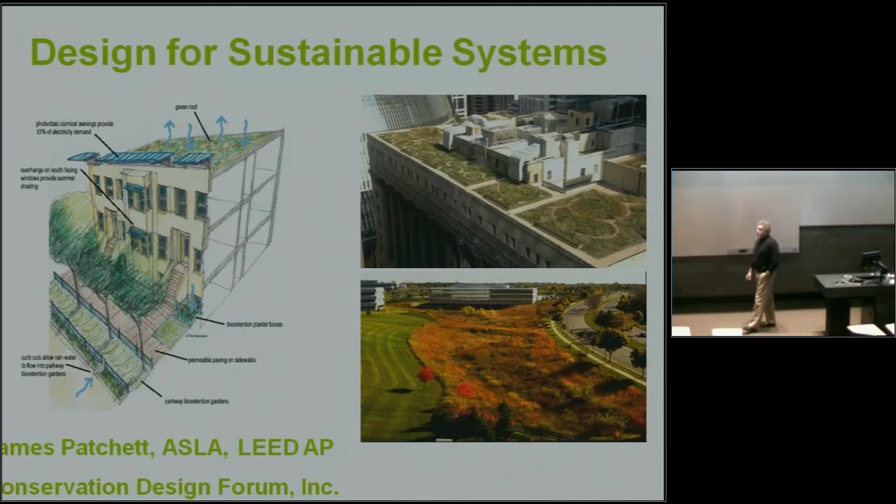My program today is going to start out with a review of historical ecosystem functions. It's going to be kind of Science 101, because if we don't understand the way the world works, wherever we live and work and play, we don't have much hope of designing sustainable solutions.

Much of our training, particularly in the design fields, historically has been more in the visual arts than deeply embedded in the understanding of ecological system functions. When you get too far onto one side—not that you can't have great beauty, you should have great beauty—but that beauty has to be integrated into the underlying physical and cultural fabric of place. That's what we're just starting to catch up on in the entire sustainable design realm.

I'm going to talk a fair amount about some of the liabilities associated with conventional planning and design practices, particularly water management practices—or I should say water mismanagement practices—because you'll see throughout the course of this program and over the next several days, while we'll talk about a broad scale of projects from very site-specific up to regional contexts, water is going to be the thread that ties all of this together for us. We're a quote-unquote water-centric design firm.

Water is where we begin every design, and it leads us through every step of the way, because it's our philosophy that if we can learn as designers and engineers and construction practitioners how to actually receive the life-giving precious resource of water as a resource, and not generate a waste product to be sent off someplace else and leave ourselves in deficit, that will lead us to quality design at every other step of the way. So water will be this underlying theme.

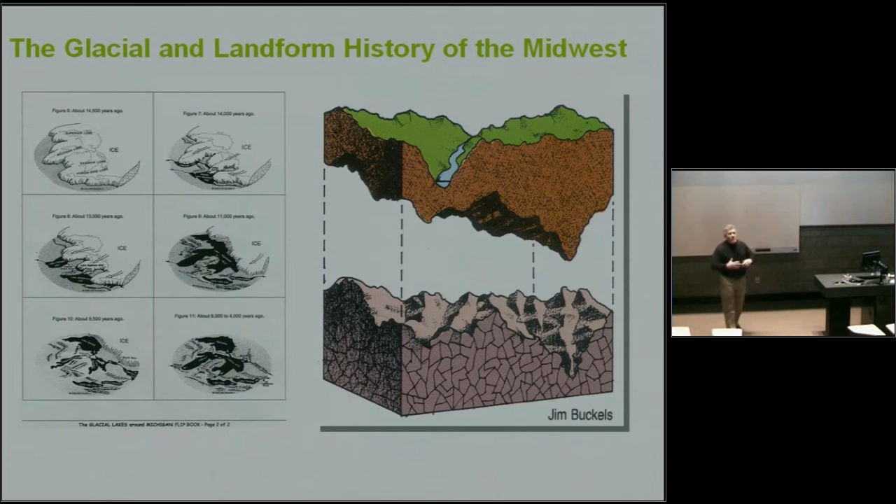Indiana, and for that matter anywhere across the face of North America, was a very lived-in landscape. And human beings had very purposeful interactions with that landscape, to the point where all of the flora and fauna and other aspects co-evolved with humans, again in very purposeful ways.

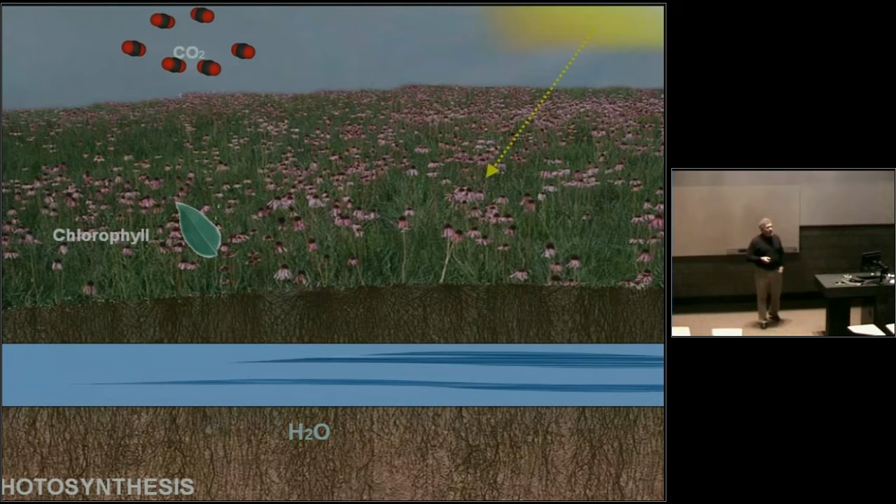So here's where I go back to kind of Science 101, photosynthesis. Of course it's why we all exist. You have essentially sunlight energy in the presence of moisture coming up through the root systems, carbon dioxide from the atmosphere, and those little green solar receptor cells in the living tissues of plants that, through the combination of these processes coming together, actually have the ability to convert sunlight energy into our life energy. So you give off oxygen and energy.

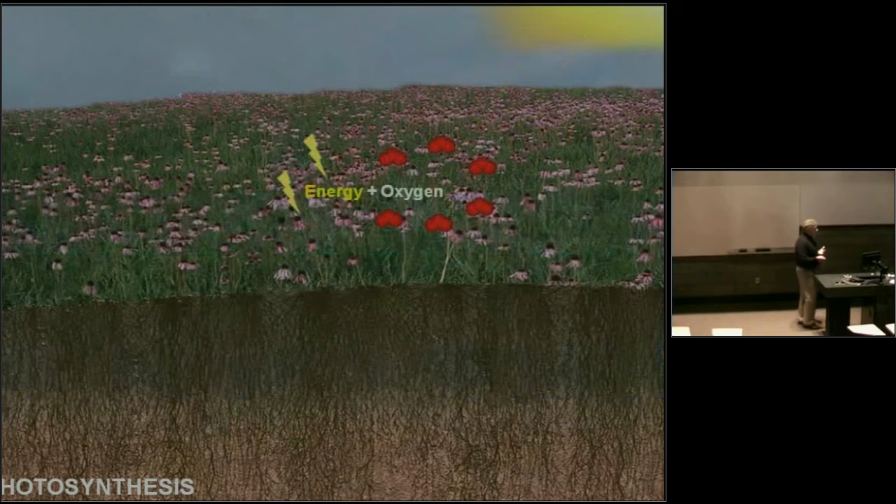So photosynthesis is essentially a fairly complex but simple to grasp combination: 6 molecules of water and 6 molecules of carbon dioxide, which produce 6 molecules of oxygen and a 6-carbon chain of sugar, which of course is our life. Every living organism on Earth has the inherent genetic ability to take that sugar and convert it into our own life's energy, the embedded energy of the sun. Without this, we would not exist.

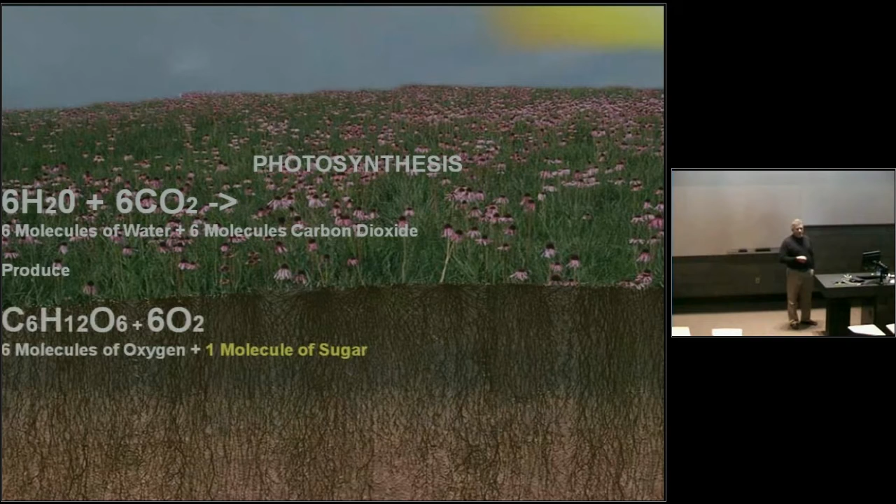Well, why is that particularly relevant? We live in a part of the world that is still part of this massive grassland system of the upper Midwest, a mosaic of woodland systems, but still a massive prairie ecology.

When a prairie ecology is photosynthesizing, if I could share one thing about the way the world works in the upper Midwest as it relates to these grassland systems, it would be this cross-section, because on average, anywhere from 70 to 90% of the total plant mass existed below ground in a massive root architecture, somewhere around 15 to 20,000 pounds of root mass per acre. Today, in an acre of corn and soybeans, which primarily covers most of the upper Midwest, we're looking at around 300 to 600 pounds of root mass per acre in an annual plant that spends most of its energy growing above ground and producing fruit, whereas this is a perennial system.

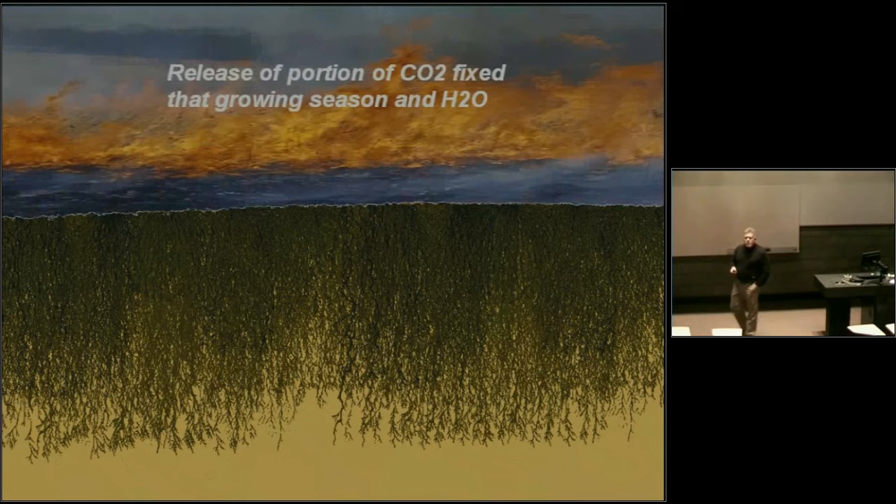As this perennial system is photosynthesizing, at the end of the year, usually within a couple of days of the first hard frost, the native people would fire that landscape off. The Algonquian-speaking people of this part of the world, their word for prairie is mashkota, meaning the burned over bare land. So they would come in and fire that landscape off, releasing a portion of the carbon that had been fixed that year, but only the portion fixed above ground in the living green tissues of plants. The rest of the carbon fixed that year, since 70 to 90% of plant mass exists in the root system, would actually be fixed underground.

Somewhere on average, probably between a half to more than 2 tons of soil organic carbon accumulation per acre per year. That annual carbon cycle removes carbon dioxide, breaks it down, and gets it into this soil structure. About a third of this root system on average dies off every year and starts to break down into organic matter. But now it's organic matter that is rich in carbon. So you take the sands, silts, and clays of the glacial till plain and slowly but surely, to the tune of 1 to 2 tons or more of SOC accumulation per year, turn it into the richest topsoil in the world.

Now, have we been very good stewards of that resource? One would have to ask ourselves. Of course, the answer is absolutely not. We've managed over the course of 150 years to waste most of it. I grew up in eastern Illinois and then in southeastern Iowa, and believe me, Iowa, much of which is a much older landscape than here in the northern two-thirds of Indiana, has primarily lost all of its 18 to 24 inches of topsoil because of annual row crop tillage—one of the most ecologically and economically unsustainable forms of land use on Earth. Yellow ain't green, folks. I came from a farm, so I'm not intending to insult any of our agricultural folks here, but the fact is it's an unsustainable form of land use in its current state.

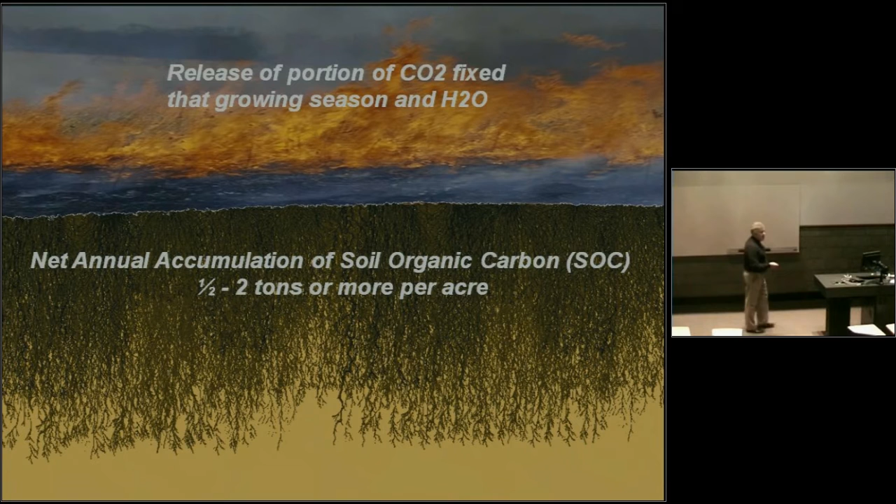So, we suck carbon out of the atmosphere and build rich topsoil with 15 to 20,000 pounds of root mass per acre. Why is that relevant as it relates to water?

Well, because we get about 37 inches of precipitation per year here. Is that about what you get? That's what we get in the Chicagoland area—I think you're fairly close to us. So we get 37 inches of precipitation, more than 90% of which during rainfall events exists over a 24-hour period in less than 1 inch of rainfall. Certainly we get larger rainfall events, our 10-year and 100-year storm events between 5 and 7 inches of precipitation over a 24-hour period, but 90% is less than one inch of intensity and duration over that period.

So you can imagine if you had a 2 or 3 foot black organic-rich topsoil blanket laced with root system across the entire geographic face of your region, what happened when it rained? Essentially 3 things occur when it rained here historically, none of which were surface water runoff. The only time of year you'd have surface water runoff to any noticeable degree would be in a spring snowmelt scenario where the ground was still frozen. You get an early thaw on top, maybe one of those late February, early March rainfalls on top of snow, and all of that water starts to move, if it can, although it's fairly flat.

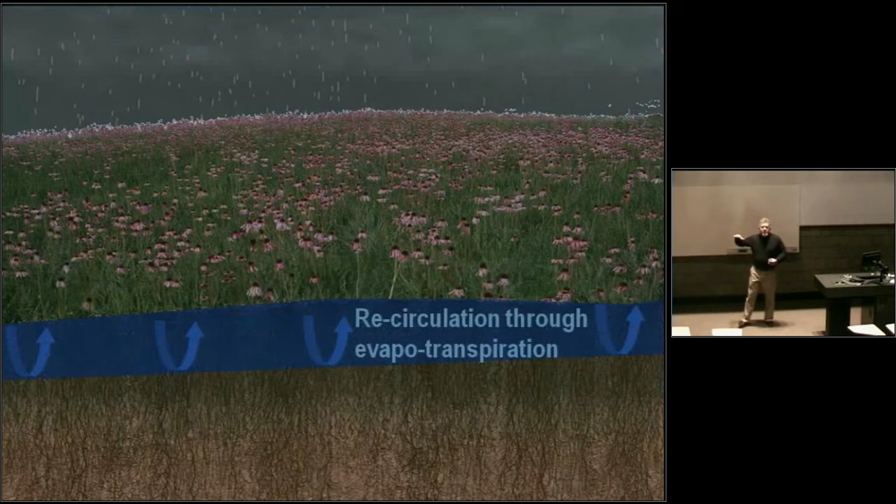Of course, today our snowmelt hydrology is quite drastically different. We have gouged and carved and piped, so when we have a snowmelt scenario, the whole system flushes itself out almost immediately. But in a general rainfall system, in non-frozen conditions, most rainfall events were probably captured in the first few inches of soil and simply evapotranspired back into the atmosphere. That's a very important part of the hydrological cycle that most engineers have virtually little to no training or grasp of.

The ability for a living landscape system to constantly be evapotranspiring - water goes out, water comes in. Every day if you walk out, even on your lawn, in the middle of summer, even during a drought, your shoes are going to be wet. In a prairie, your whole leg was wet, depending on what time of year it was. So it was a very self-watering and wet system.

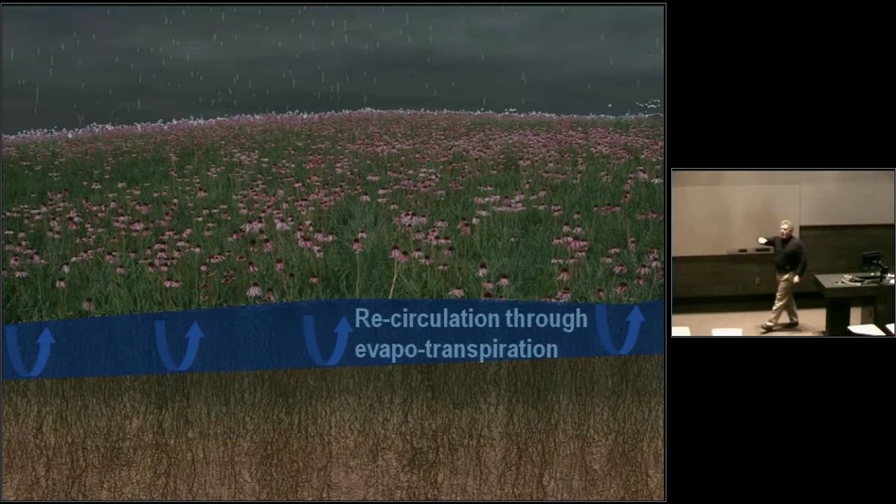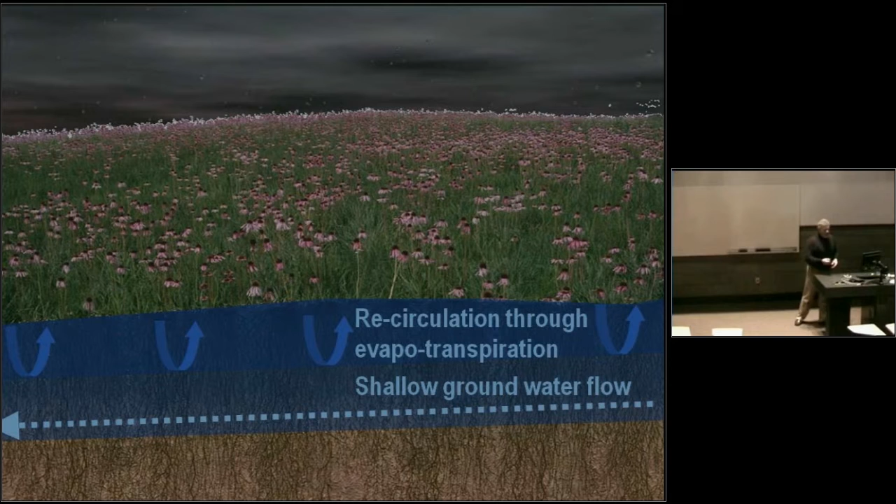As you get more free water moving down through those root systems, now you're influenced by the combination of topography, geology, soil structure, and you start to get lateral water flow above the water table in the vadose layer. Eventually you get recharge of your groundwater systems as more free water moves down there. So the recharge of our aquifers occurred across the whole landscape, most effectively in the areas that were slightly higher and better drained.

And then the wetlands were actually formed - all of our aquatic systems formed and sustained by discharge, constant, steady discharge flow. The most important thing that I can share with you today relates to the function of historical terrestrial and aquatic systems and the relationships between them.

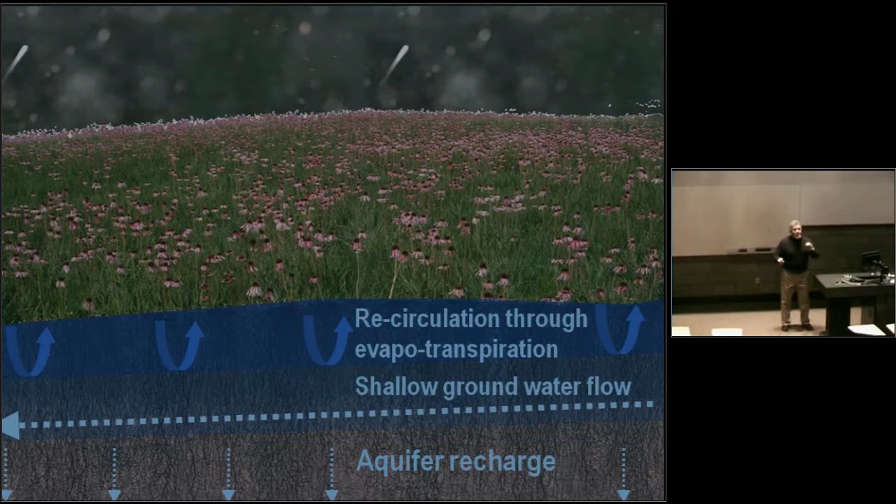So water moves out, dries back up, goes into the atmosphere. It doesn't run across the surface of the ground virtually at all.

Now, I wish I could say that I learned this in college. After all, I went through 4 degree programs, 2 major universities, and every one of those degree programs was related to the relationships of water and land. I didn't. I was trained in surface water hydrology and civil engineering as the conventional collect, pipe, and discharge. That's the way we're all trained - collect, pipe, and discharge. Unfortunately, the world just doesn't work very well when we misbehave in such ways.

I actually learned about the way the world works hydrologically about 20 years ago from one of my colleagues today, Dr. Gerould Wilhelm, who's a botanist and ecologist. I'll share with you, hopefully briefly, my professional epiphany, if you will.

I had been working for a firm in Ann Arbor, Michigan, Johnson, Johnson & Roy, back in the 80s, and we were doing a lot of wetland mitigation design because the state of Michigan had a Wetland Protection Act in place since 1978, requiring that all impacts to wetlands must be mitigated, regardless of size, type, scale, or origin.

So we would get out there, and we thought we were fairly creative in our design. We had a multidisciplinary team - landscape architects, hydrologists, ecologists and others all working together - and we were very diligent about identifying the appropriate suite of plants native to the county we were working in. We would create little vegetated swales and marshy areas to try to buffer the parking lot discharge as best we could from the Meijer or Walmart or shopping center we were mitigating for.

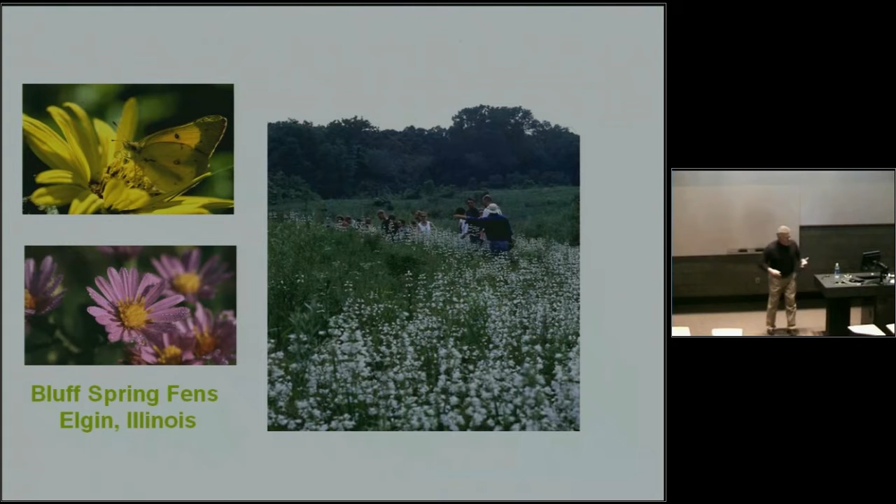So anyway, we're wandering around Bluff Spring Fen, and Jerry, of course, being the botanist that he is, spewing Latin out left and right. Well, I had been doing restoration sort of work at that point for well over 10 years, and I knew a lot of the standard, or usual, suspects, if you will.

But we were in a whole different realm, completely different realm of plants. I maybe had heard the genus before, but I certainly had never seen these species. And as you wander through the trails and along the hills, and then you get down into these seep zones, you see water discharging 365 days a year.

Doesn't matter whether it's rained or not, doesn't matter whether it hasn't rained. Because when it did rain last time, water got into the ground and is always working its way through the ground, where it slowly seeps out at 52 to 54 degrees, because that's the annual average groundwater temperature. Slightly alkaline in water chemistry because the soils are derived of dolomitic limestones. Steady, stable, utterly stable. You can see that as you walk along.

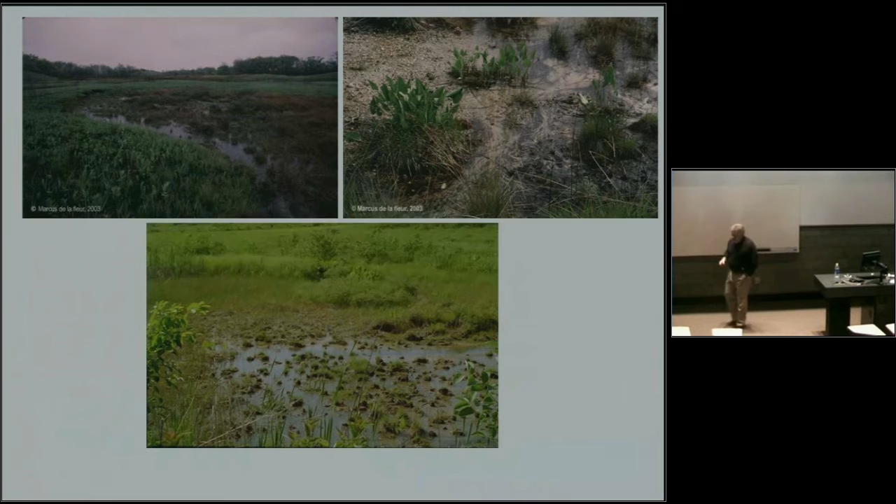And then we get down along the trail, and you see little holes in the ground start to open up. Here's this wonderful formation of a little woodland prairie stream, something that would have been replicated throughout this landscape around here in the upper Midwest millions upon millions of times, because this is the formation of our stream and river systems. This is how they came together with enough embedded water energy in the ground to actually come to the surface and form a stream.

And as we're walking down along the trail you see wonderful things going on. There's plenty of little erosion and sedimentation areas and so on, but this also reads like a who's who of Illinois threatened and endangered plant species. I mean, orchids and sedges that I'd never seen or heard of before. Just very, very interesting.

And you see that the hydrology is so stable and the water chemistry is so stable that there is the capacity for this system to evolve, for change to occur at a rate that plants and aquatic organisms actually adapt to. That is the inherent systems stability that was present after the retreat of the glaciers.

And as we wander down through there, Jerry is spewing off his Latin some more, and we get down to the end of Bluff Spring Fen, and you realize that it could pour, and I've been down here during and immediately after torrential rainfall events, and that little stream system never changes. Or long periods of drought, doesn't matter, never changes. The hydrology is always sustained by steady, stable base flow.

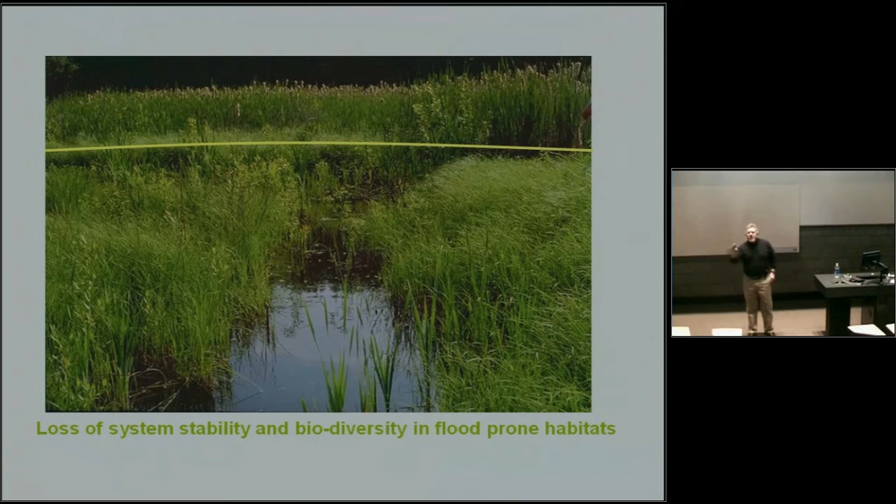Scary. Now, when I would go out and give these kinds of programs, even still today, but you can imagine 10, 12, 15 years ago, big rooms of 300-400 civil engineers, and I'm telling them that virtually everything they've been trained to do in stormwater engineering is goofy on its face. They're like, eh? Or they look like a deer that got hit in the headlights, as the light bulb starts to go off. Oh my God, wow. Or they just don't believe it. That's really a big part of the problem. They simply just don't believe it.

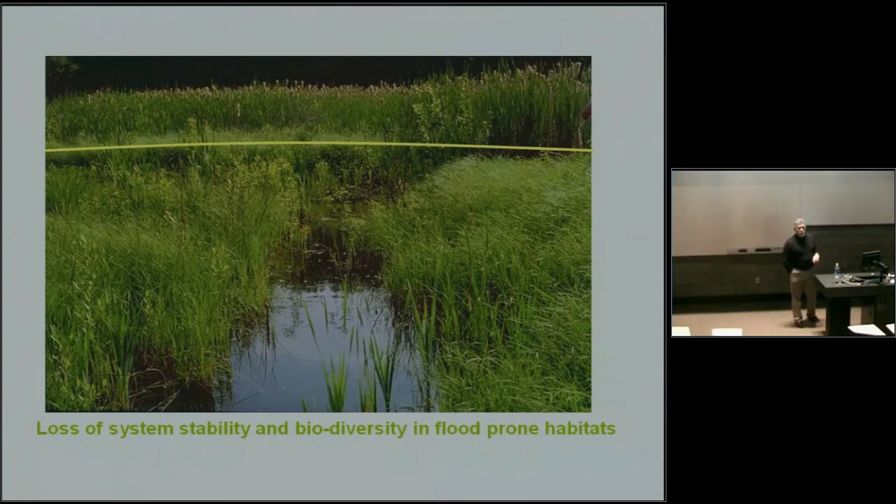So the historical patterns of hydrology are not dominated by runoff, but by steady, stable groundwater hydrology, and inherent water quality and chemistry from groundwater. The cross-section of most of our river corridors here shows that, and the interesting thing about plant establishment historically is that the flat till plains, because of the constant moisture moving in and out, were too wet for trees to grow. But that's where the water went in, across the whole cross-section. Right along these hillsides, along the bluffs and terrace areas, where you would create this little cone of depression, the trees could get a foothold. So, too dry for trees, too wet down in the discharge zone for trees, just right. That's the historical context of the relationships between grassland and woodland systems.

Now, of course, today we have so completely altered the hydrology, particularly the groundwater hydrology along our stream corridors, that we in the upper prairie states think we have forested floodplains, which is absolutely goofy on its face. It is a post-agrarian phenomenon to have the kind of vegetation growing up along our river corridors in the flat, low-lying areas. That is not a historical context.

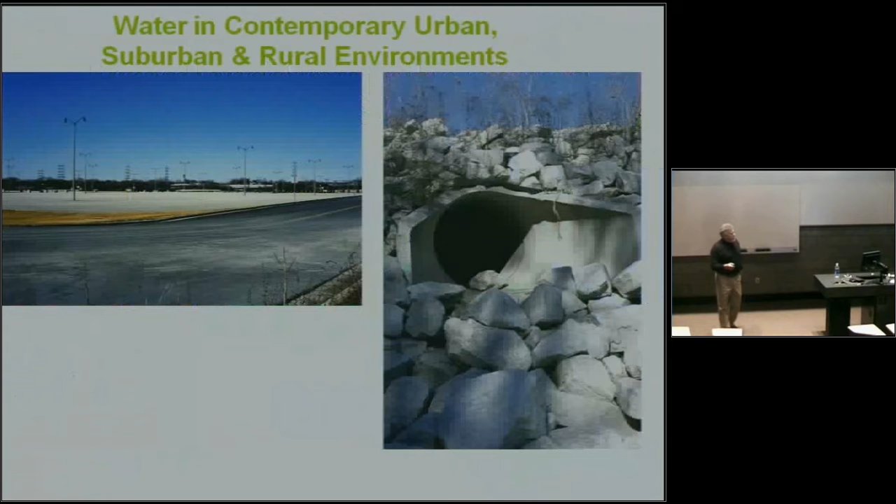Now, if you take a look at the way we're trained today, standard stormwater management means collecting water as quickly and efficiently as the law allows, almost always through enclosed storm sewer systems where we create concentrated points of discharge.

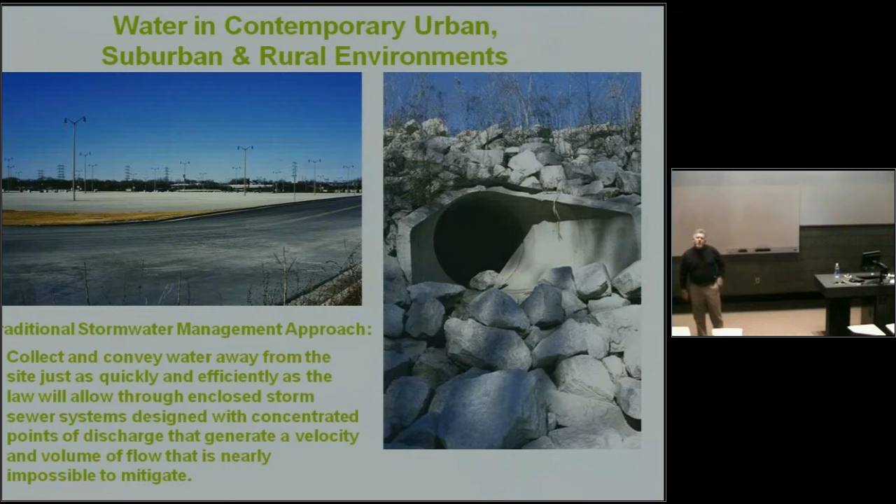Occasionally, by law, we are required to hold that volume of water back and then inject it out through our stormwater detention basins, like a lethal injection, into our streams and rivers. And we have codes and ordinances that mandate such behavior. Why, from a landscape perspective, you would think it really isn't outdoors.

It's simply exterior decoration. If I get my standard street trees by code and ordinance every 50 feet, uniform, and heaven forbid a tree might have a mind to grow a branch that's slightly different from the next one, because then, of course, you see, oh, this one's bad. The warden, that's what Jerry likes to call the landscape contractor, would unceremoniously come out and chop that little branch off so it looked ever the uniform little lollipop like the one right next to it.

And then, if you have a really good landscape architect like us, well, then you plant your little groups of shrubs in 3s and 5s and 7s and 9s and 11s, and every once in a while we'll throw in a 6 or an 8 just to be creative. And then everything that isn't covered by a building or a parking lot or a roadway must be covered by the one uniform landscape element required by code, and that would be the turf grass lawn.

Of course, along the way, as a development interest, we might have any specific fantasy we can dream up, like, oh, gee, I want so many square feet of buildings and parking lots. I got to have a little bit of open space out there, but we'll put the turf grass lawn in there. Now, because the turf grass lawn would die if it sat in water, and of course we mass grade because we have the ability through our bulldozers and our wealth...

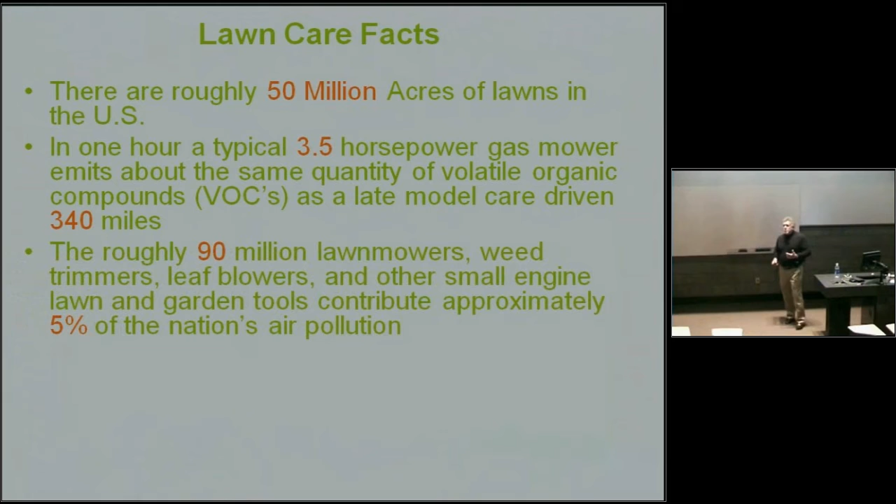A few lawn care facts along the way. One of the largest crops in the United States today, the turf grass lawn. For every 3.5 horsepower engine that you burn out there, you could have driven a contemporary non-hybrid car 340 miles. Roughly 90 million lawn mowers, weed whackers, gadgets, and gizmos represent 5% of our annual air pollution across the face of North America. The EPA estimates we spill about 17 million gallons of it a year just trying to get the lawnmower filled back up, and that's actually more than the Exxon Valdez spill.

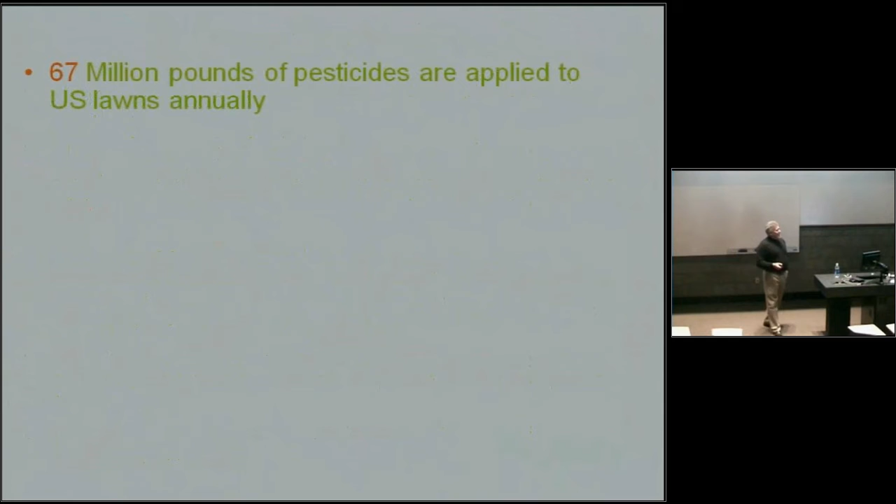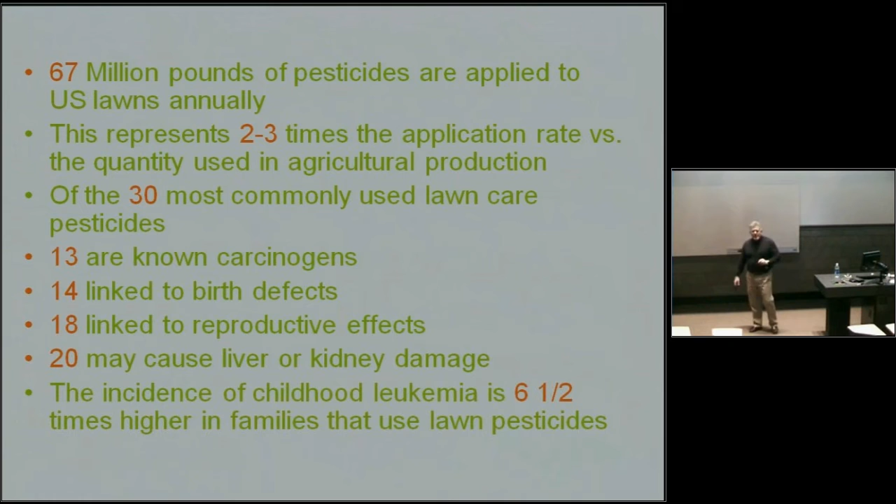We use 70 million tons of fertilizer, 67 million pounds of pesticides. That's actually 2 to 3 times more than what is used in contemporary agriculture, which of course has plenty of its own problems. Of the 30 most commonly used lawn care pesticides, 13 are known carcinogens, 14 are linked to birth defects, 18 linked to reproductive effects, 20 may cause liver or kidney damage. The incidence of childhood leukemia in a family that routinely uses lawn chemicals is 6.5 times higher than one that doesn't. And of course, if you like your cat and your dog and you let them go out and roll around in the lawn and they eat the grass, well, then they're 4 to 5 times more likely to actually get kidney and liver cancers themselves.

And of course, where does the water go? Now that it can't go back into the ground, it goes out through the pipe. But we followed the law. We have a stormwater control ordinance. We've held back that volume. We're good neighbors. It's just being sent out now, along with 40 to 60% of the nitrogen and phosphorus and other sorts of things that are also going with it, getting into our ground and surface water supplies.

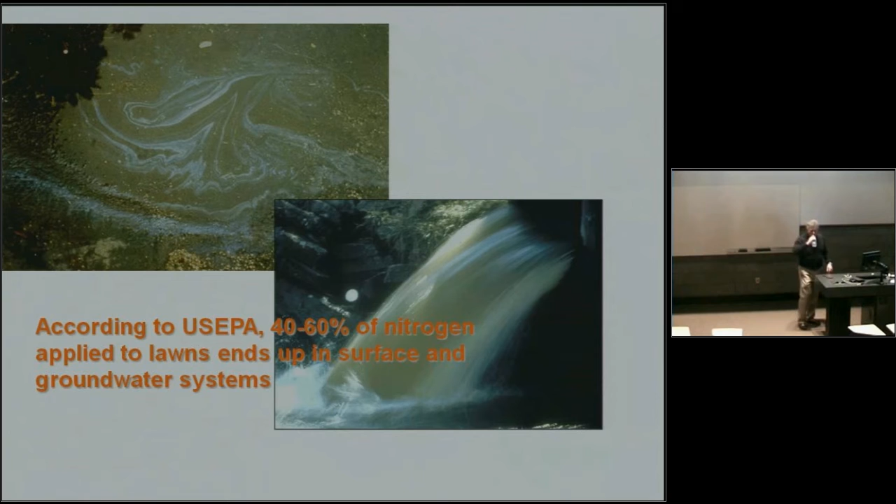So you start to see it's a pattern of problems. Now you've got your detention basins - dry bottom detention basin, wet bottom detention basin - but when you send all of the water from throughout the site into the little 10 to 15% of your property that's designated for the hole in the ground, that becomes problematic because it's very unstable.

Well, us engineers say it's no problem. We get a big fluctuation out there, we'll just armor it. It's very attractive - of course, geese like it. If you naturalize the edge of these places, the geese aren't quite so sure they want to go there because something might eat them. But when you armor it, hey, this is a great place for geese. And while geese lose the genetic memory of migration within one generation, they certainly haven't lost the ability to eat, reproduce, and poop - these are things they do very effectively.

We like it, we must like it - we write it into every law. Often because the holes in the ground have steep slopes, we put fences around them. I call this the water in jail syndrome. If you have an inexpensive piece of property, you can get away with an ugly chain link fence. But if you have a really valuable piece of property, something you wish you could do something else with other than build a hole in the ground on 10 to 15% of your site, then you've got to dress it up with a really nice fence.

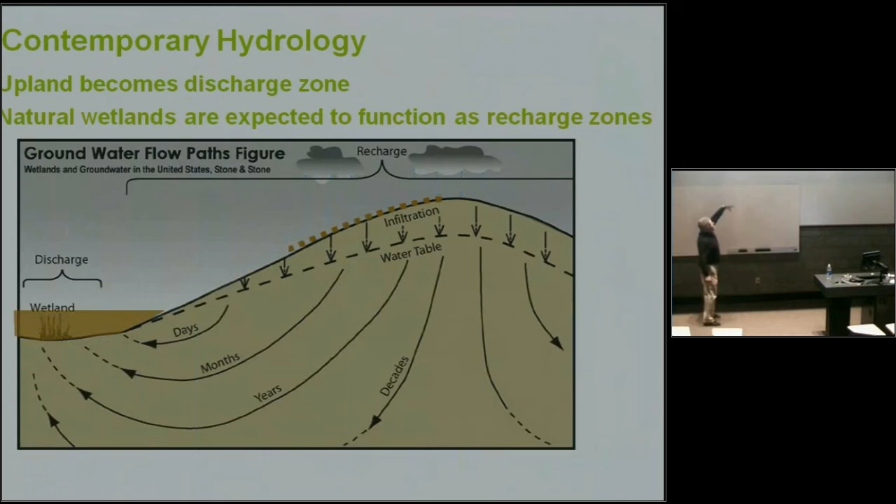So contemporary hydrology has actually changed 180 degrees from the historical context of stable groundwater-driven hydrology to one of very unstable surface water hydrology, where we pick up everything and dump it right on top of the wetlands, then come up with the completely absurd rhetoric that wetlands are for recharge and they're good. The primary functions and values of wetlands and aquatic systems are stormwater storage and water cleansing. How have we become so disconnected?

Well, we live here and here. This is what Jim Kunstler calls the triple NIMBY syndrome: I don't want a backyard in my backyard like my backyard. I love that one - no wonder you don't want development to occur next to you, it's going to look like yours.

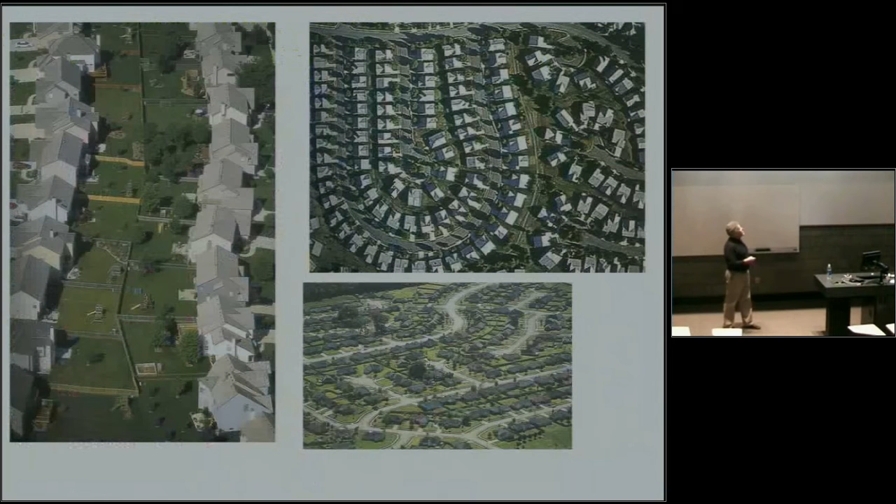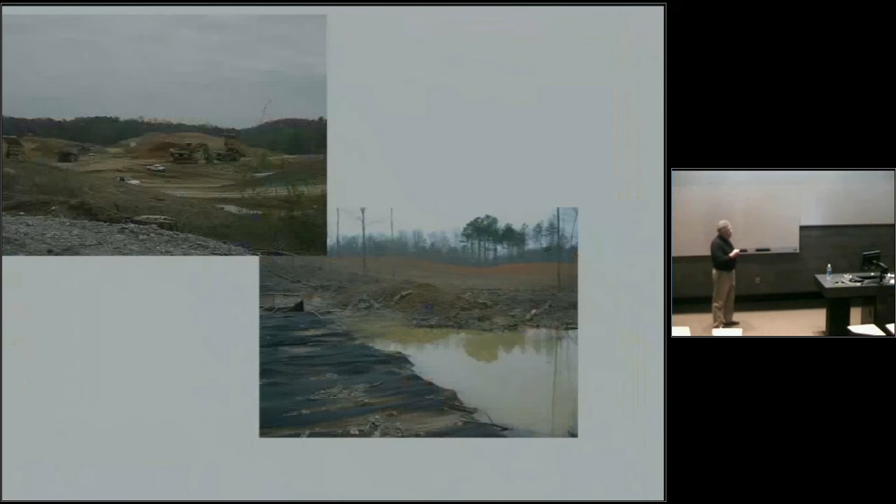And of course, agriculture - we're oblivious to the rules but we're still governed by them whether we're aware of them or not. And we have the money and machinery to do anything we want, anytime, regardless. But unfortunately the physics of design comes back into play, because for every action there's a reaction, and when it comes to water out of place, that is a very powerful reaction.

And of course, what do you do? Even the accumulated effects of detention basins within the context of a watershed often look a lot like this when you get a nice rainfall event. What do you do? It's the rain's fault, it rained too much. And of course, along the way, the entire shift in the hydrology and the quality of water tears apart our infrastructure, our historical and built infrastructure.

And it's not just a matter of the built environment being the problem here - it's the fact that we have completely disassociated ourselves with the historical environment, what we might call nature. You see, we have definitions of nature being pristine and unaffected by humans. Well, there is no such place, for goodness sakes.

Absolutely none. And certainly not here, where every single thing a human being needed to survive on a day-in and day-out basis 150 to 200 years ago, here in the Muncie, Indiana area, existed within walking distance of where you lived - your apothecary, your grocery store, your clothing store. You had to understand these things, how the world around you worked.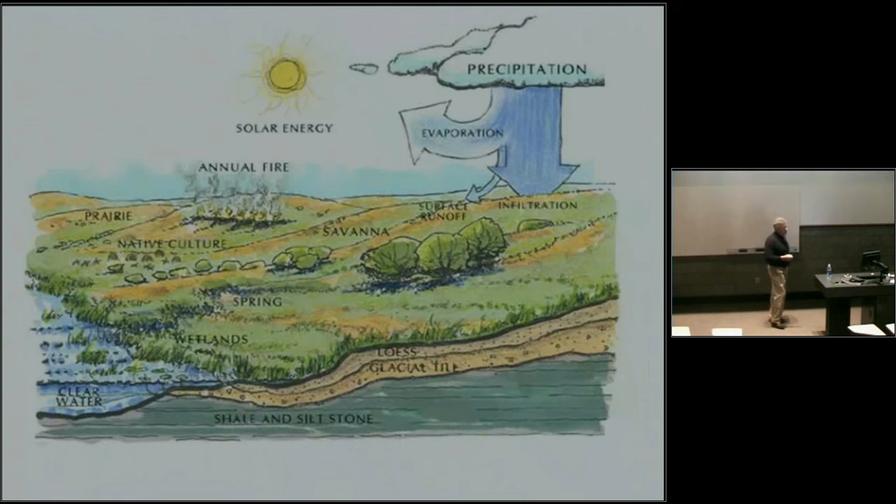Every plant had a use. Everything was used, and all of the native plants and animals became adapted to that kind of interaction—not just adapted, but reliant upon, like the annual cleansing fire, and all the other sorts of human interactions with the landscape. But of course, today, when we remove ourselves, in comes... well, here we are.

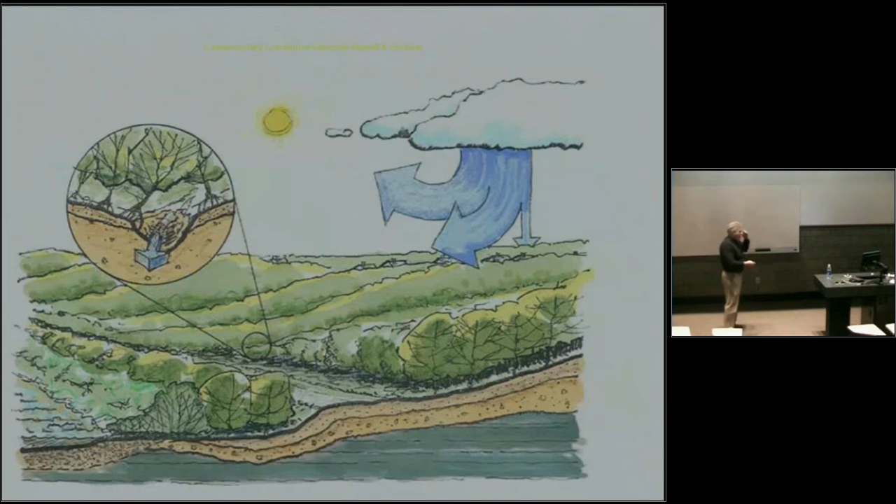Well, this is a riparian floodplain forest. Oh, God. Okay, the problem is plants need light. No light, no plants. No plants, no fibrous root system. No fibrous root system, no organic soil. No organic soil, no plants. Bare soil. Rainfall gets down through there, hits—if you've got any kind of topography, it's gone. Where it used to go into the ground, it's gone.

And what's left behind? Well, a contemporary woodland-looking thing instead of a historical woodland-looking thing, which had tremendously beautiful biodiversity, many functions and values, most of which are gone.

But if you start the process of restoration, if there's just that little bit of inkling of a living plant, a germ material still in that soil, the ability to respond to a human restorative effort is absolutely stunning. What can happen?

Once they're gone, they're gone. The toolkit, the repair kit, the genetic memory of your place, gone. That's why every little remnant piece of living tissue is so critical. It's all we've got here, folks.

There's about 90 weeds that grow everywhere. They are the weeds that followed the people who disturbed the land, both in the United States and other parts of the world. That's about what you've got if you disturb or destroy the 1,000 or more native plants that you have. And once they're gone, they're gone.

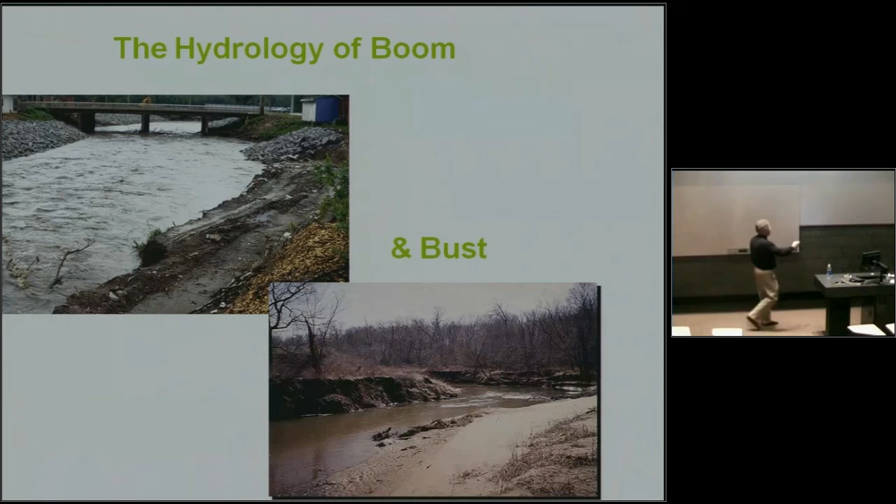And along the way, we live today with the hydrology of boom and bust. When it rains, massive discharge. When it doesn't rain, the whole stream systems can dry up. That would have never happened historically. And what's left behind is this deeply incised, constantly collapsing system, pulling the groundwater down with it. And we think all of our streams are supposed to look like this.

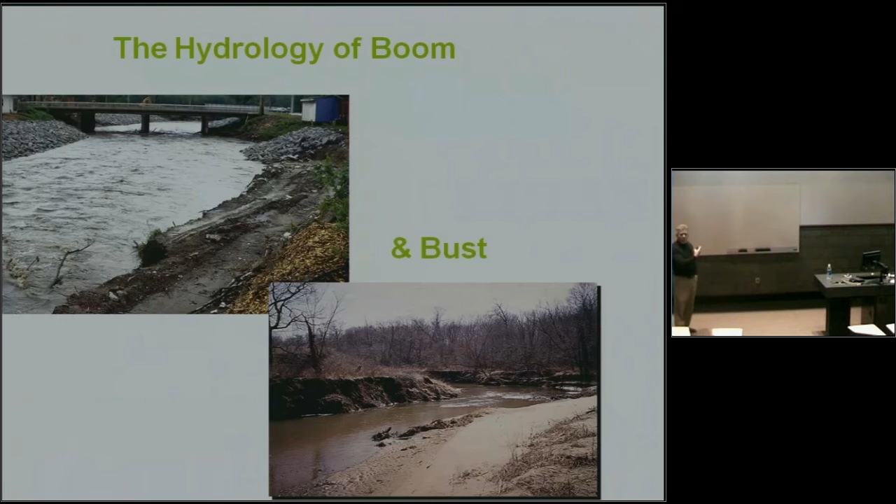And all our wetlands are supposed to look like this—the riparian schmutz, the very few plants that actually grow in this kind of crap.

And of course, as I mentioned, along the way, everything ends up going down to the Gulf of Mexico. And unfortunately, Illinois and Iowa alone contribute 35% of the hypoxia going on down there. Of course, Indiana's helping out plenty on their own as well.

So, the CDF doctrine: water is a precious, life-giving resource, and it should always be treated as such, and never treated as a waste product. And if you design with this thought in mind, we believe it will lead you to great beauty, great function, and great stability within the context of any place you're working.

So our philosophy begins with water, to promote integrated water resource management everywhere, because water falls every place. Every place that receives water is a place for great design and beauty. In contrast to conventional approaches of collection, piping, and discharge, it's one of receiving, cleansing, diffusing, absorbing, reutilizing, getting evapotranspiration to start up again, and not leaving ourselves in deficit.

Because here's where the math doesn't add up: we as a society cannot continue to get 36 or 37 inches of precipitation a year, send two-thirds to three-quarters of it away as a dirty, polluted waste product, and then suck more and more out of our aquifers. That's what you live off of down here—you live off of aquifers, and those aquifers are drying up. Everywhere across the face of North America, our aquifer systems are drying up.

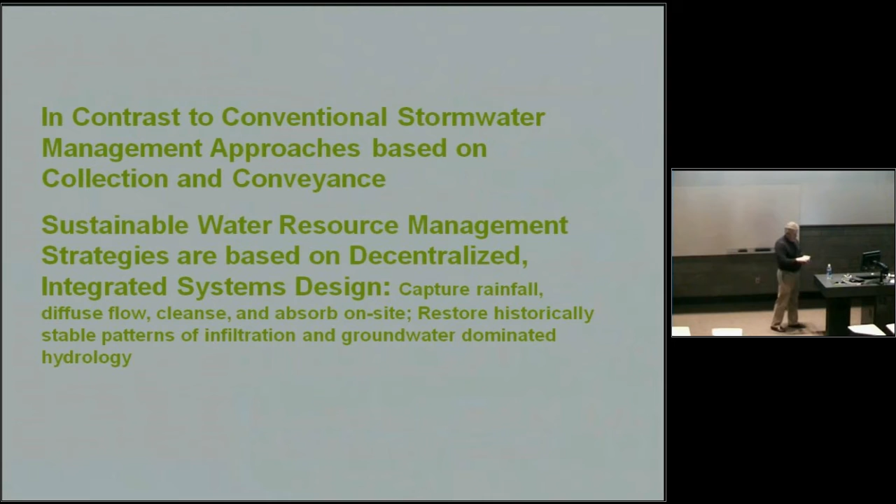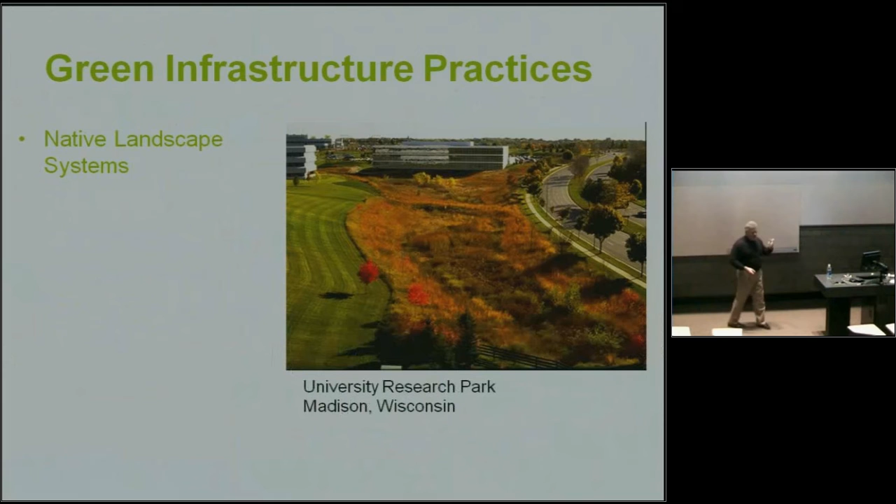Think green, think decentralized, green infrastructure technologies, native landscapes - redeploy beautiful, life-sustaining landscape systems. It's life, not just a horticultural collection of things, and that's not bad - I'm not saying you can't do that, but find a balance between contemporary ornamental landscape systems and living, self-replicating landscape systems that don't need watering, fertilizers, herbicides, or pesticides, will absorb all the water on site, provide multiple wildlife habitat benefits, and great beauty throughout the year.

Green roof technologies: if you live in Europe today, particularly Germany, virtually every major city mandates all new construction be built with green roof systems. Number one reason is regional water resource management benefits. Even a shallow, lightweight, extensive green roof - really 3 to 4 inches of lightweight modified soil mix on top of a permeable sub-drainage layer - will effectively, in this part of the world, capture and evapotranspire anywhere between 50 to as much as 80% or more of the annual rainfall that falls on that roof.

If you live in a community like Chicago with a combined storm sanitary sewer system, somewhere between 500,000 to almost 1 million gallons of water never get off your roof and fall into that combined system in a year. Like in September 2001, when we got a 4-inch rainstorm in downtown Chicago that within an hour completely overwhelmed the combined storm sanitary sewer system, resulting in 2.1 billion gallons of untreated effluent being directly discharged into Lake Michigan, which closed the entire shoreline for the rest of the season. Completely unacceptable behavior.

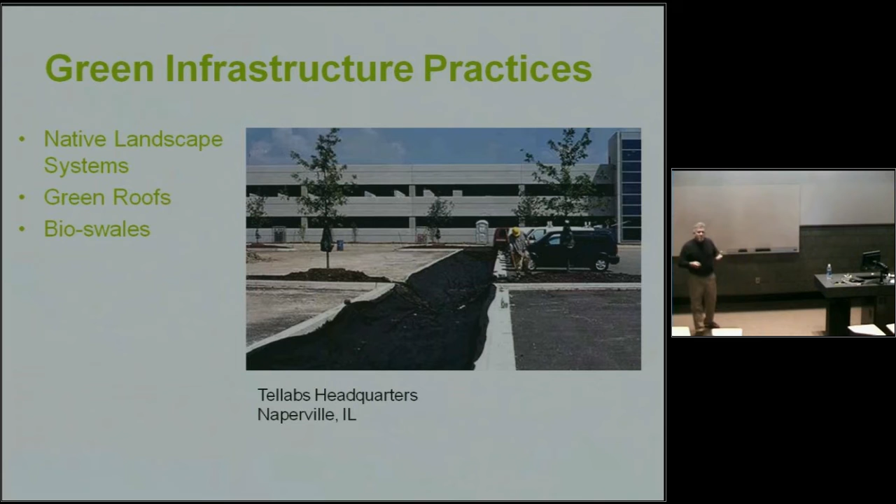Bioswale technologies: instead of the regular convex cross-section, which is extremely hostile to anything trying to live in there, simply invert it and allow water to sheet drain in. There are enough plants we can work with that will tolerate this sheet flow condition, helping cleanse that water and get it back into the ground. Porous and other permeable paving systems - whether modular systems, asphalt, or concrete - are very effective as part of a system.

That's why the title of this presentation is Designing for Sustainable Systems. This is a systems approach to design - the complete integration of architecture, landscape architecture, civil engineering, art, and ecology. No one human being, no one profession has the technical skills, breadth of training, and life experience to do this alone. It's inherently a multidisciplinary, collaborative process. You can't just think, 'I'll stick in a couple of BMPs.' Jerry flips out when somebody mentions a BMP in our office because it drives him crazy - BMPs are like an end-of-the-pipe kind of solution. You've got to get beyond the BMP; these are totally integrated systems approaches.

Level spreaders, essentially a linear French drain placed along the contour, allow either a sheet drain or a concentrated point of discharge to be picked up, diffuse all the energy, and send it along the contour, letting gravity be your friend. So if you have to have infrastructure, this is a highly effective alternative.

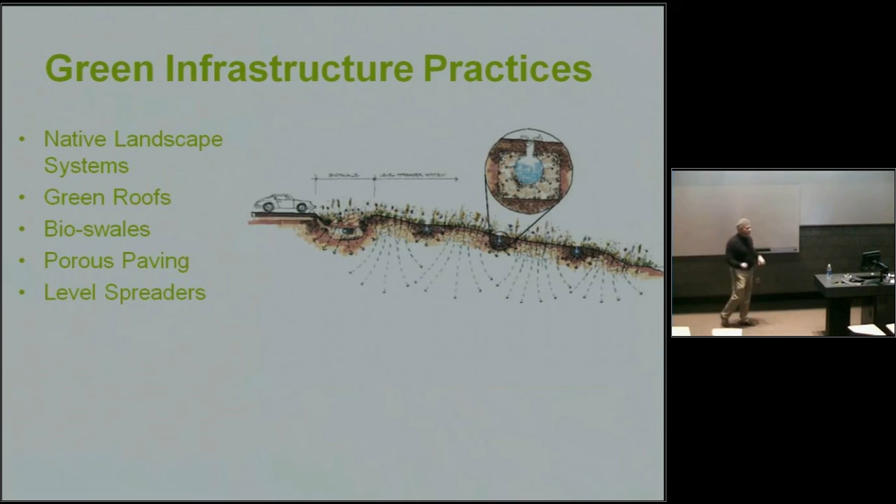Rain gardens - everybody's got a rain garden program now for good reason. They're very effective if you design them right: the ability to take a downspout, a small element of impervious cover, and simply diffuse that water so it can be cleansed and absorbed back into the ground in the context of where it fell. You can design them in so many different ways and contexts.

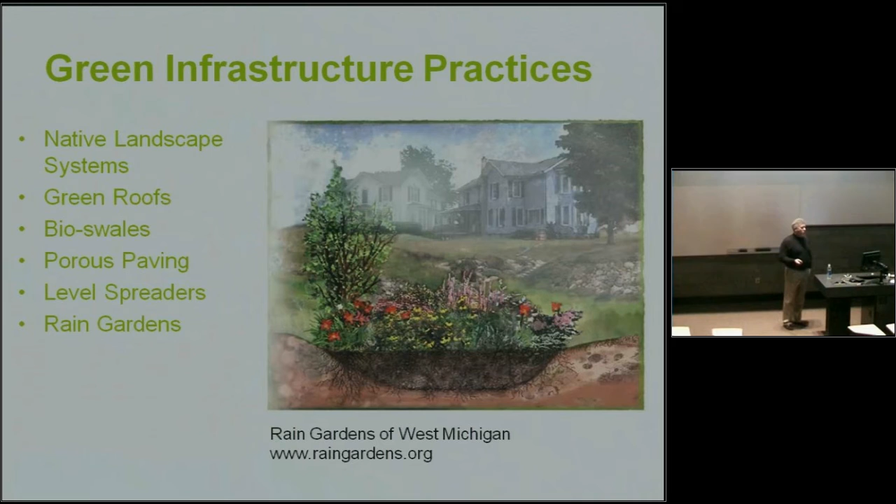And of course, ancient technologies like rainwater harvesting - virtually any farm, home, or city building built prior to the 1920s within this community had cisterns, because our forefathers and mothers realized how important it was to be conservative with water. We're just adapting these technologies today. Here's the Chicago Center for Green Technology, designed by our good friends and colleagues Doug Farr and others, or at the home scale with rain barrels - simple little technologies.

And then retention: if you have to, by law, incorporate an element of storage capacity within your site, make it the last line of defense. Never pipe something directly to it, never connect an impervious outlet - always have it be part of a system and the last part of that system, so maybe you've got a green roof, porous paving, and bioretention working together first.

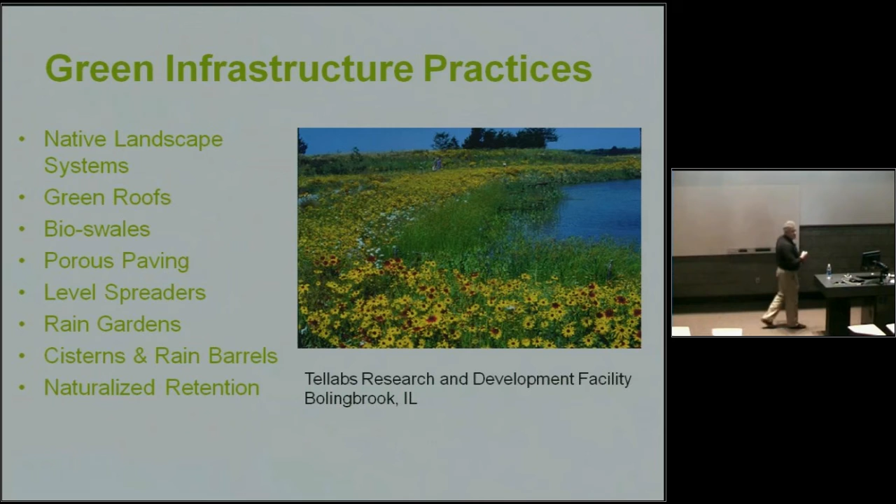The overflow of all those mechanisms, which often doesn't happen, might finally make its way in here, but more likely it's going to make its way in through groundwater movement. And then you can actually create a system like this, these retention areas, that can sustain a fair amount of biodiversity and real functions and values.

When we first started doing these projects, most of the ones I'm going to share with you in the next few minutes were illegal when we started them, because the codes and ordinances wouldn't allow us to do infiltration-based design or incorporate native landscapes. And of course, the first thing out of the city engineer or director of public works' mouth was, sounds good, I don't believe it, you've got to show me the data.

So we worked with the US EPA and did a 2-year study in the Blackberry Creek area, out in the west suburban Chicago metropolitan region, where sprawl is heading out as fast as it can get there.

We took the existing 2020 master plan for development and all the codes and ordinances of all the communities along the Blackberry Creek corridor, and said, okay, here's what we're going to do. David did all of this planning. We're going to design a series of templates, commercial, retail, residential, mixed use, all based on your existing codes and ordinances and standard development practices.

Then we're going to use the same kinds of densities and develop an alternative that's more of a sustainable green approach, more of a community-oriented approach, a combination of traditional neighborhood planning or new urbanism combined with these infiltration-based green infrastructures.

And then we're going to model them on 100-year storms, 10-year storms, 1 to 2 year storms, water quality indicators, habitat indicators. The bottom line of that 2-year study was that these green technologies were extremely effective, not only in significantly reducing the amount of runoff that would get off the site, but actually restoring groundwater hydrology to sustain the quality and character of the historical stream systems within the watershed. So green development could actually be restorative by nature.

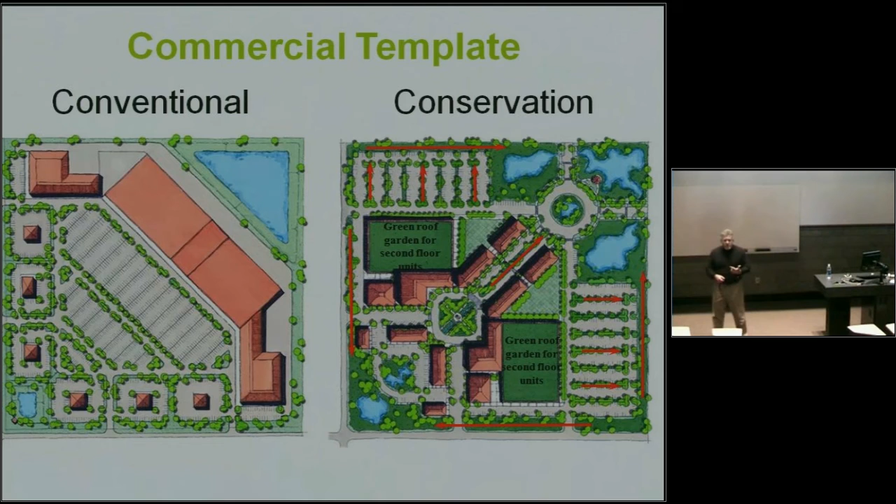So we actually did another 1-year study in cooperation with the EPA, the state of Illinois, the University of Illinois, and others, and proved that yes, indeed, it is actually less expensive to build green—not only in terms of capital development costs, but less expensive to sustain through the costs of community goods and services, green versus non-green.

We modeled this over the entire watershed and showed them that if they developed according to their existing 2020 comp plans, they were going to have horrendous flooding problems. They thought, well, we've got a stormwater control ordinance—well, they don't believe that anymore. In fact, almost all of the communities have adopted these design guidelines as part of their development strategies now.

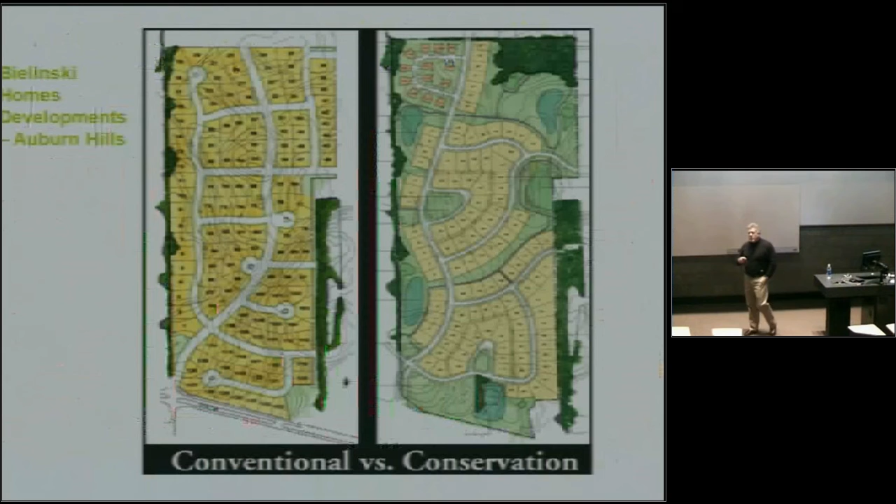All of that information is available online either through the EPA or the Chicago Wilderness or through our webpage at www.cdfinc.com, and I'll show you that later.

We do a lot of what we call around the country future alternatives analysis, where we go in and do 2 or 3 day workshops with communities. This was one just north of Atlanta along the Etowah River, where a developer was kind enough to allow us to use his property, which he had already developed—mixed use, big box retail, some residential apartments, and so on and so forth.

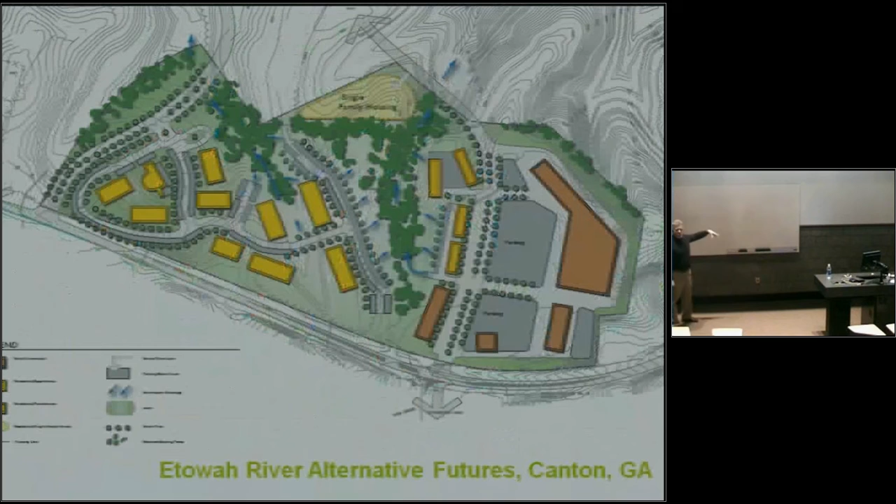We took the same square footage—in fact, we increased the development square footage overall—and instead of this, came up with this, then modeled it and gave them all the information so that it was actually less expensive to build, didn't generate runoff, and they got more developable square footage out of it.

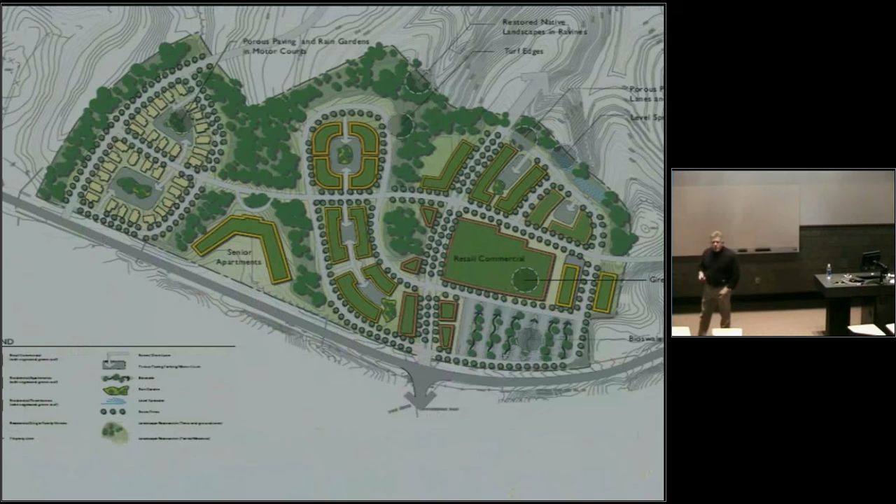It's a much more community-oriented approach, and you can do these sorts of things over and over again. Where it really gets interesting, though, is when you start this integrated process. It takes, and this is a simple principle, not just our principle, it's a first principle.

It takes a committed sponsor, an experienced team, and a truly integrated design process to design functional, sustainable systems. How do we do it on a variety of different types and scales? I'm going to go fast and furiously here because I've got about 20 minutes.

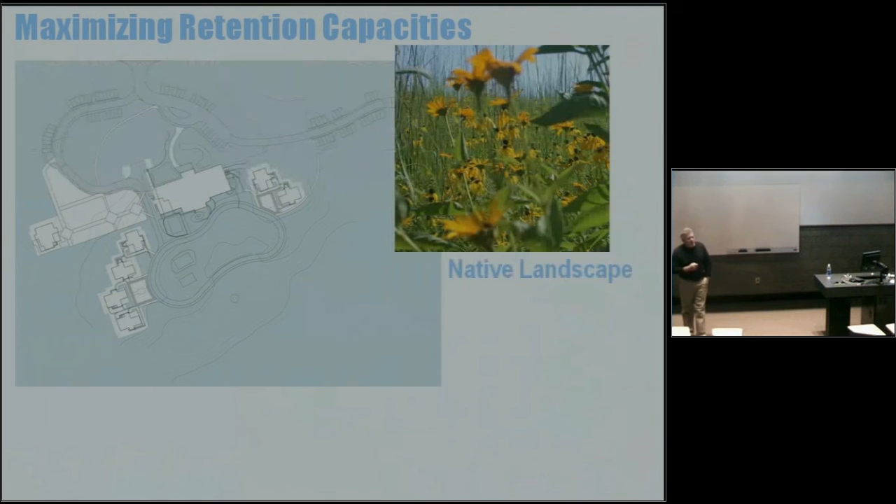This is the Merry Lea Environmental Learning Center for Goshen College up in Wolf Lake, Indiana. Some of you may have visited before. Because it's a nature center or environmental education center, they really didn't want a lot of turf grass, so almost all of the landscape is native landscape, and virtually all of the pavement areas are some type of permeable pavement system.

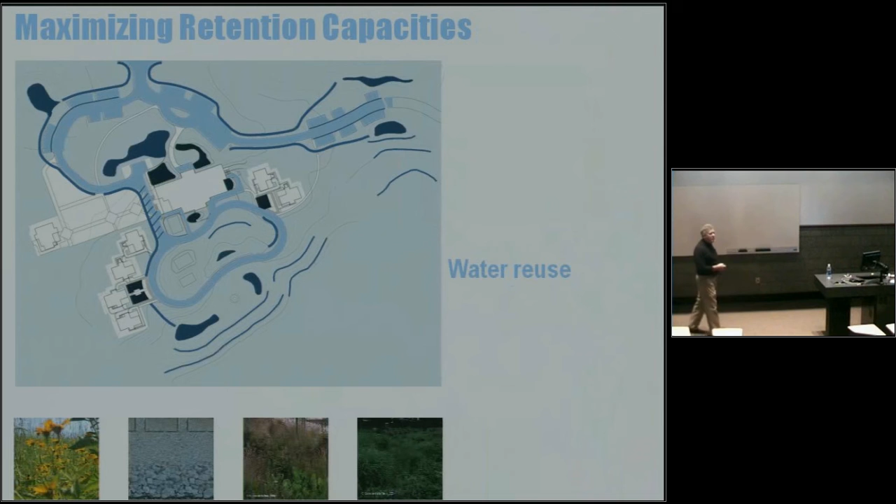This is how we integrate these solutions. We have bioswales and retention rain gardens, and then we have water reuse here. We work with John Todd Research and Design out of Massachusetts. We have biological wastewater treatment systems, rainwater harvesting and reuse is zero discharge. There is no runoff that ever leaves this property. There's no waste that leaves this property. You can do everything I'm talking about here at your home.

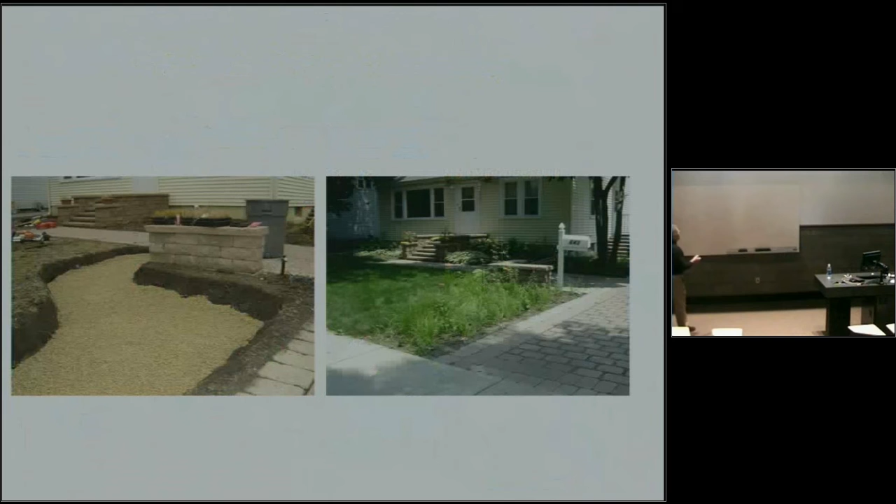You can have rain gardens, you can have porous pavement, you can have green homes, you can do anything that you want. This happens to be my little one-fifth acre lot with my little Cape Cod house in Elmhurst, Illinois, the combination of which means no water leaves my property. Simple to do, but if I'm the only one on my block, am I going to make a difference?

Just like recycling, absolutely not. If everybody on my block did this, it starts to add up. Everybody through the community doing this on a site-by-site retrofit basis, well, now that's interesting. On a watershed, you can see the cumulative effects can very quickly change something we take for granted, like flooding and water quality degradation and habitat loss, and simply turn it on its ear. It's simple to do.

This is where we need to be putting our money, instead of another big deep tunnel, goofy boondoggle sort of thing that us engineers would come up with.

And it's attractive. This is actually another one of our colleagues in our office, Marcus de la Fleur. He wrote a grant, got a little green roof for the front of his house, reconnected his cisterns, got his rain barrels, his entire landscape is native, his driveway is porous pavement, and so on, and no water leaves his property. He put together a wonderful little brochure, which you can download off our website, that talks about how to design and implement all these kinds of green infrastructure technologies, and he has it out on a tree in front of his house so people walking by can pick up a beautiful 6 or 12-page brochure and learn all about sustainable design and development.

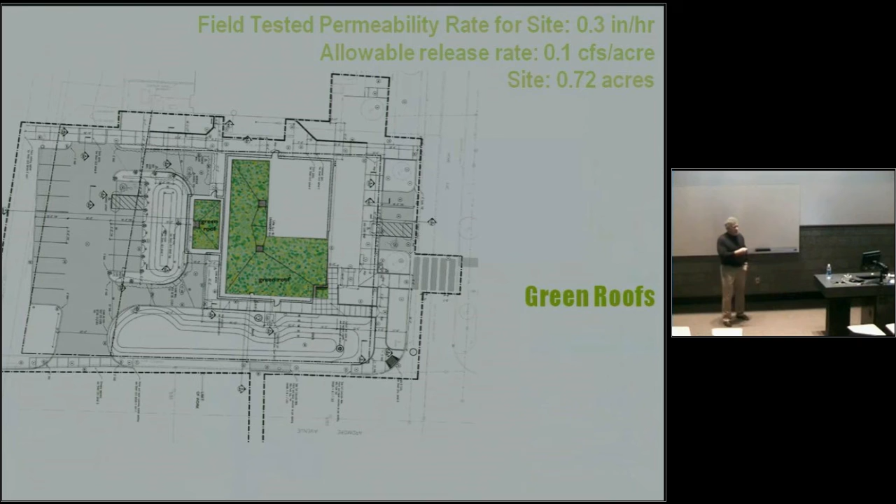Here we have a green roof system. This is a three-quarter acre infill site with no room for a detention basin. So we worked with the county, we worked with the city, and we eliminated conventional detention basins altogether, yet we're able to satisfy all of our codes and ordinances by an integrated solution of green roof.

All of the pavement is a modular porous pavement system. There are integrated rain gardens and bioretention, and we couldn't take into consideration any infiltration occurring within the cross-section of that whole system, so we had to have an overflow with a standpipe. Yet this site has never generated any runoff, and we're able to satisfy all the codes and generate a zero-discharge urban infill development.

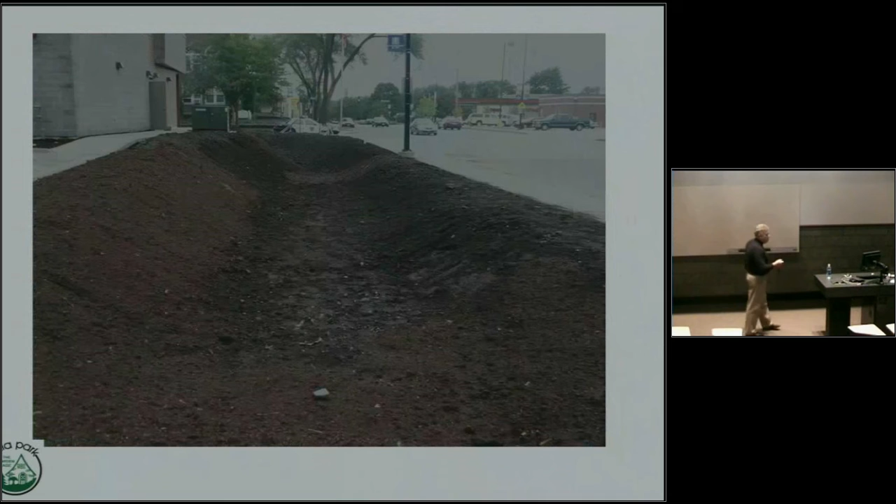All of our storage capacity is either a combination of below ground or above ground, and we had a massive tornado and storm event in mid-August where we lost power for 4 days in our office. We were doing a training session for the Chicago Metropolitan Water Reclamation District, permitting civil engineers and compliance engineers, on how to design and use these kinds of green infrastructure measures. We came out to this site in the afternoon after a massive rainfall event the night before, and there was no water standing anywhere within any of these swales, and no evidence of any water that had ever gotten into the overflow down into the pipe system below and out into the municipal storm sewer system. So if you get a runoff event from here, build the ark and get on it, because we got problems.

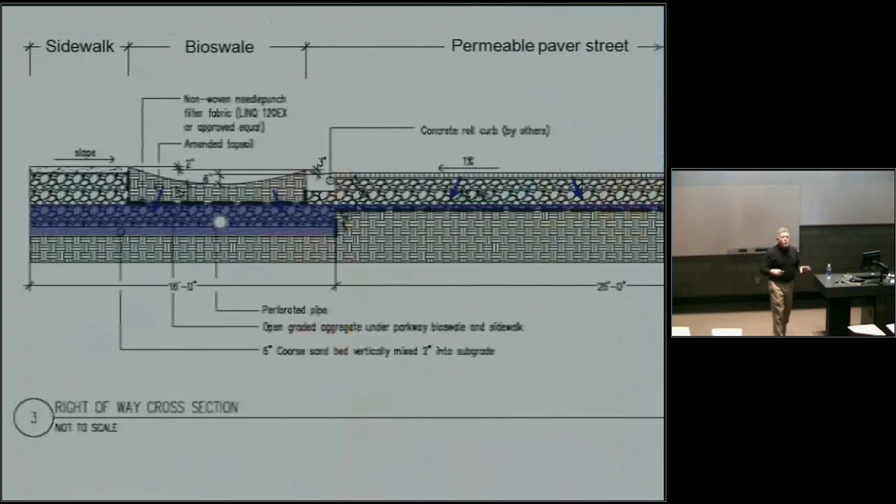Josey Heights, this is a brownfield redevelopment, the city of Milwaukee's first allowed modular porous pavement streets and alleyways project. The way we designed the cross-section, we're able to satisfy the codes and ordinances for stormwater management within our street and parkway cross-section and along our alleys in continuous rain gardens. You can see how those pieces kind of came together, and that's water that's being absorbed, not sent someplace else.

As it's getting built, you can kind of see the cross-section. You just put the pieces together so that there's always an overflow, but the overflow is really an underflow.

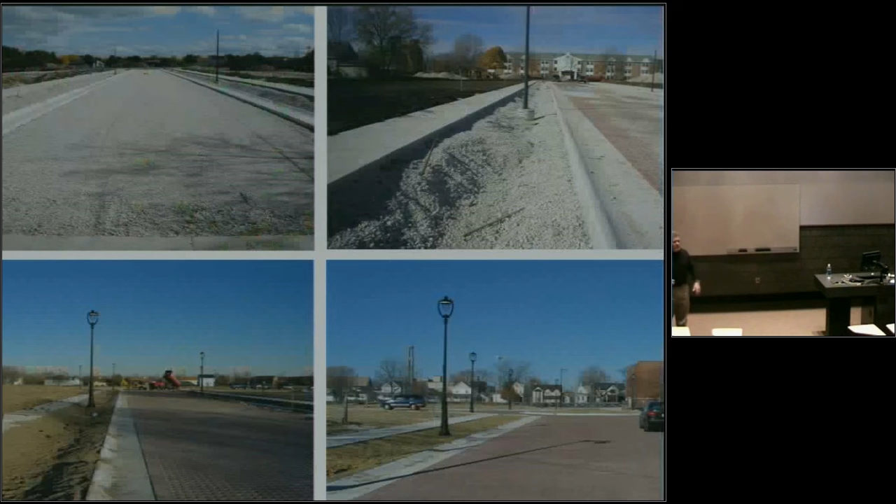She wouldn't walk in, and she started screaming at us. We were there with another landscape architecture colleague of ours who worked in Madison, and his office was in this building. At first we were so focused on what we were looking at, we didn't hear her. Then we finally looked up, and she's just yelling and screaming. She evidently thought that we were part of the University Research Park building group, and that we were identifying where the next building was going to be built out into the prairie. She was mad. Finally, Bruce Woods, our friend, said, 'Ma'am, these are the people who designed and installed this prairie.' And she just said, 'Well, don't screw it up.' Then she got back on her way and walked along, and we all looked at each other and went, geesh, I guess when you think about it, that was a pretty nice testimonial.

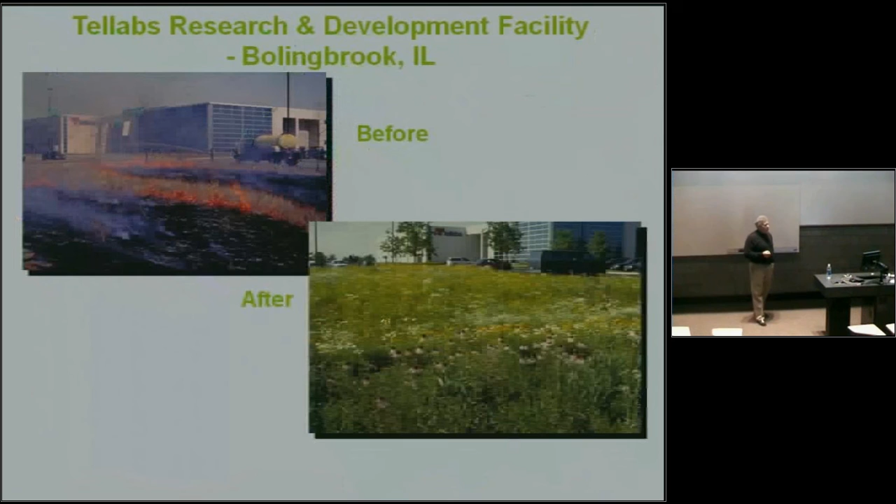This was in the spring of 1992, or actually late winter. I did my little slide program about the benefits of native landscapes. I didn't have a lot of imagery back then, just pictures I had been taking myself over the course of several years. The only project even underway in the entire Chicago metro region at that time was Sears Prairie Stone, which we'd been involved in. So I was talking about, well, Sears did it—don't you want to kind of keep up the pace?

I gave them all this spiel, and they're like, yes, oh, it sounds good, we could get some good PR. Yeah, we could get some good PR. Then finally, at the end of my program, they said, but we can't afford to do it this year—no, first they said, no, we just can't do it this year. I knew what they were thinking. I said, oh, really? Why can't you do it this year? Well, yeah, we can't afford to do it.

I said, okay, how much money are you spending on turf grass maintenance? We do an 8-month mowing contract, 3 fertilizer, herbicide, pesticide applications on this campus a year. It's about $2,500 an acre.

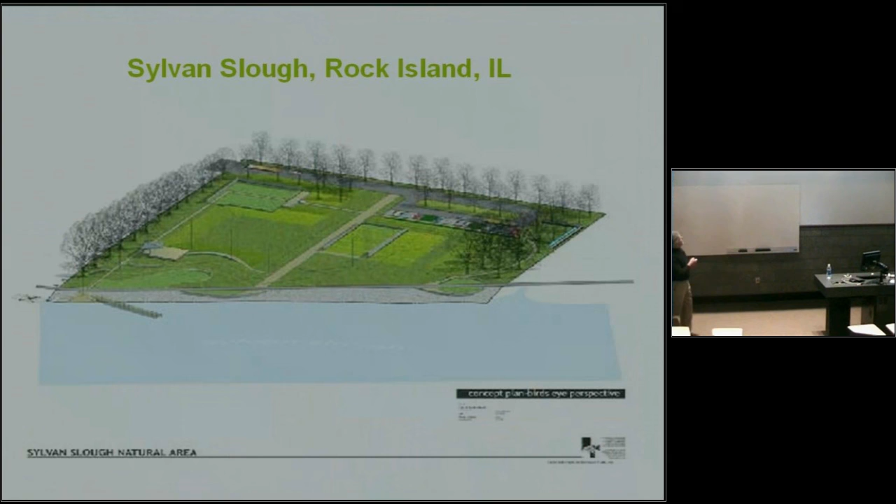This was being funded as a 319 non-point source water pollution control project. So there's all of the green infrastructure, porous pavement, rain gardens, bioswales, water recirculation gardens. But we kept, these were the concepts, and we kept the foundational walls and some of the other pieces of the industry that had been there.

And it's, like you can see in these images, it's kind of a cool place. Now the landscape has just all been seeded and planted this year, and it's all native, except for a couple of little pieces. That's just starting to come in, but it's really fun to play with these ideas.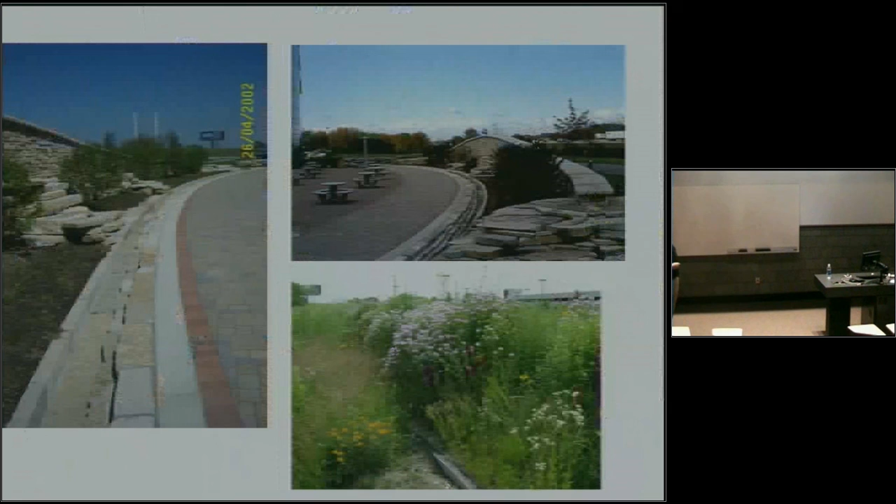Here's our paver runnel. The paver runnel discharges into the level spreaders. It cost $80,000 less to build this than it did the conventional approach, because we had to do the cost comparisons when we were in conceptual design, rather than continuous storm sewer and curb and gutter versus this kind of low infrastructure. We have very little storm sewer systems on the site.

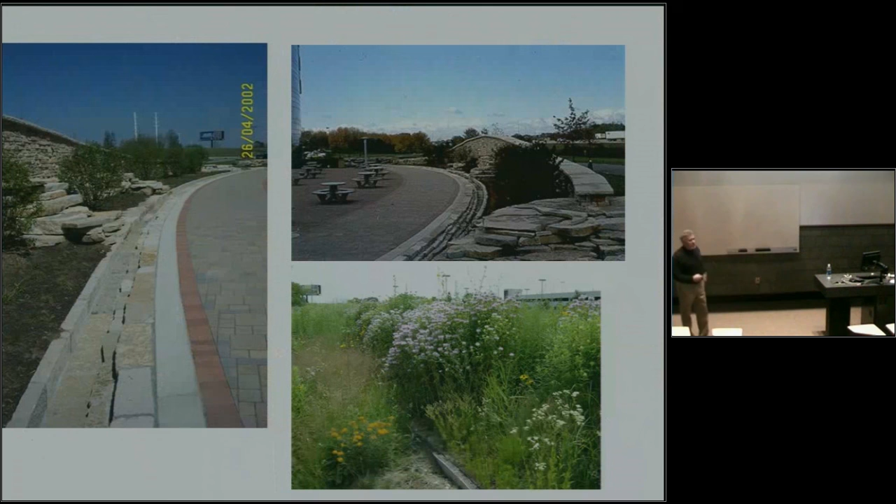As I mentioned earlier, if you have native landscapes, actual remnant systems, it is very important to preserve and build around and then interpret these. This actually just got a LEED Platinum rating, the new Evelyn P.

Tyner Nature Center at the Glen in Glenview, Illinois. Interestingly enough, during the entire construction process last fall, as the green roof system was going down, a local resident hawk was hanging out and watching them construct the green roof every day. Every single day this hawk showed up and just hung out and watched them. I suppose it was looking for mice. This is what it looked like this spring during the dedication.

Coffee Creek Center, Chesterton, Indiana. One of our real first larger community-wide events to try to build something like this. Again, infiltration-based infrastructure, water recirculation.

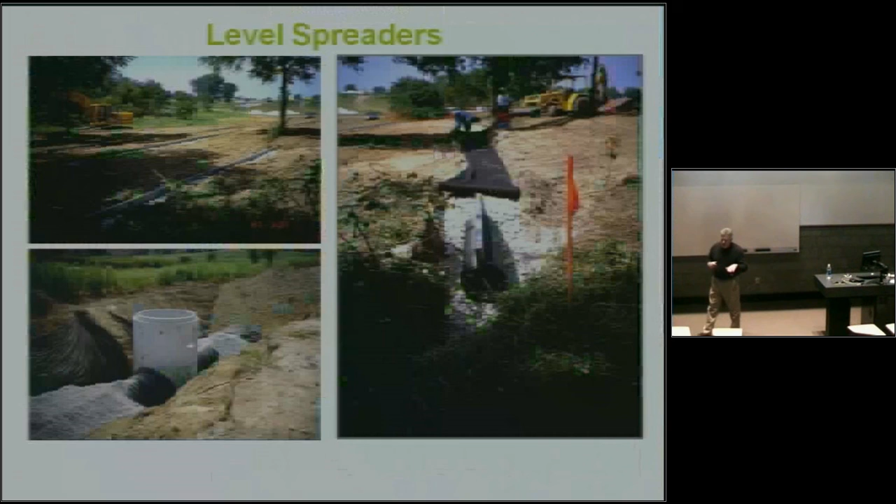Overflow into level spreaders. The level spreaders then allow water from impervious areas to be cleaned and go back into the ground. Along the actual stream corridor of Coffee Creek, which had been completely overwhelmed by agricultural weeds within the first couple years of maintenance and management, because water was now getting back into the ground and wasn't subject to erosion and sedimentation annually like it had been from the ag runoff, very rare and very conservative sedge meadow plants, flowers and sedges and other things were all starting to pop back up from the seed bank. And it even surprised Jerry that it could happen that quickly.

Even the little restroom has its own little green roof and biological wastewater treatment system. I could tell you a lot more stories about Coffee Creek, some good, some not so good, and maybe we'll talk more about that as we go forward. But it really is still a place that I enjoy going out to as best I can.

The ability to harvest water and integrate it into the context of anything that you do. Here, just the Peggy Notebaert Nature Museum, extensive green roofs. The green roofs discharge over scuppers down a living wall. The living wall then accumulates water into these little bioretention areas. There's a small cistern and a wind and solar pump system that recirculates that water back up the living wall to irrigate the little pockets of vegetation growing on it.

The second story has a different type of rainwater garden living roof system. And the landscape is primarily a native landscape. So here you have a nature center in the middle of Lincoln Park that essentially generates no runoff.

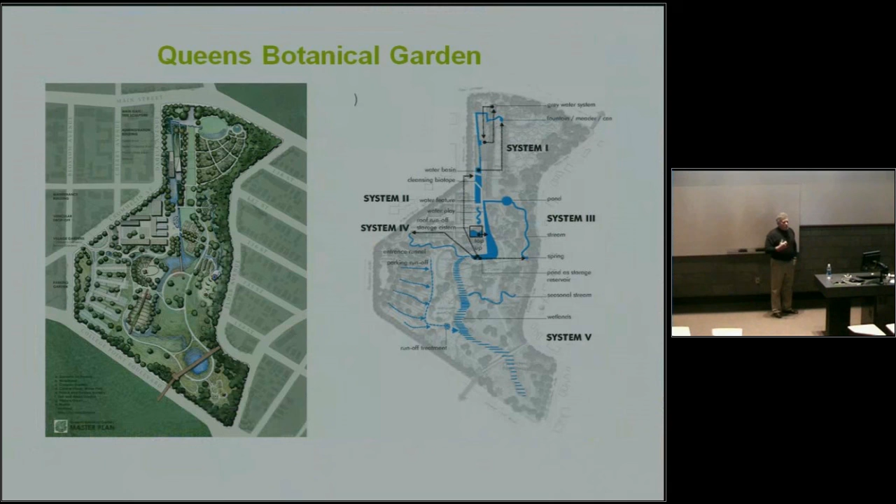David was there. This is what the concept was, so there's all of this rainwater harvesting and reuse. The interesting thing about when we worked on the master plan, we were working with our colleague and good friend Herbert Dreiseitl from Germany, who, if you've studied any of his work, it's just wonderful work. I usually show some of it in my programs, but I'm already just about out of time here.

But always water being a very visible and integrated part of the art and ecology. And everything within this site, all of the water features, are collected rainwater and recirculated rainwater, with no discharge on site.

And the interesting thing about the Botanical Garden is that within the 2 square miles of this 38-acre site is the most ethnically diverse neighborhood in the world. More languages and more ethnic cultures come together in this small little neighborhood.

And during the planning process, it was very interactive because all of these different community folks had a piece of the garden which was theirs, where they had their weddings, their funerals, bar mitzvahs, et cetera. But the one unifying element in every culture was water. And so water became the unifying design theme.

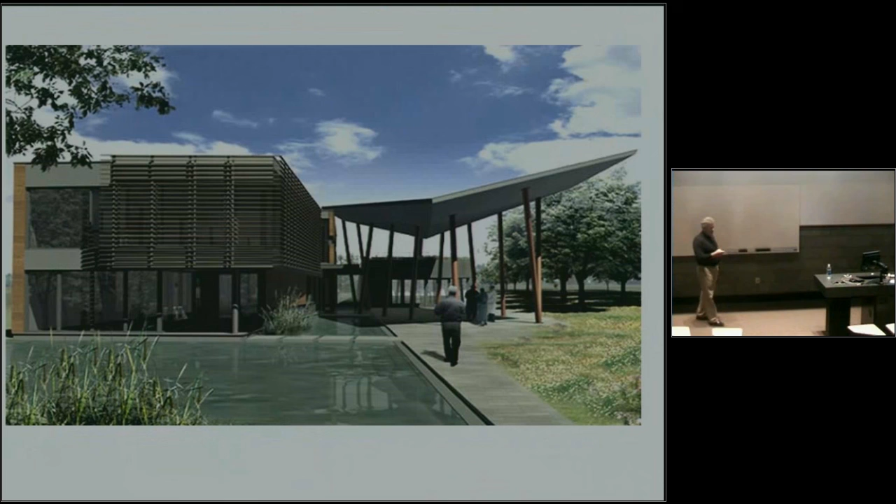That's actually the image of what that looked like in reality during the dedication. Here's another concept, there's what it looks like. Another concept, here's what it looks like just coming in. And then water features, again, the thread that ties the entire garden together as it gets built out.

Kresge Foundation headquarters in Troy, Michigan. This is also going for LEED Platinum certification right now. Rainwater harvesting and reuse. The building is tucked back down in. Water is kind of one of the real driving forces behind the entire design.

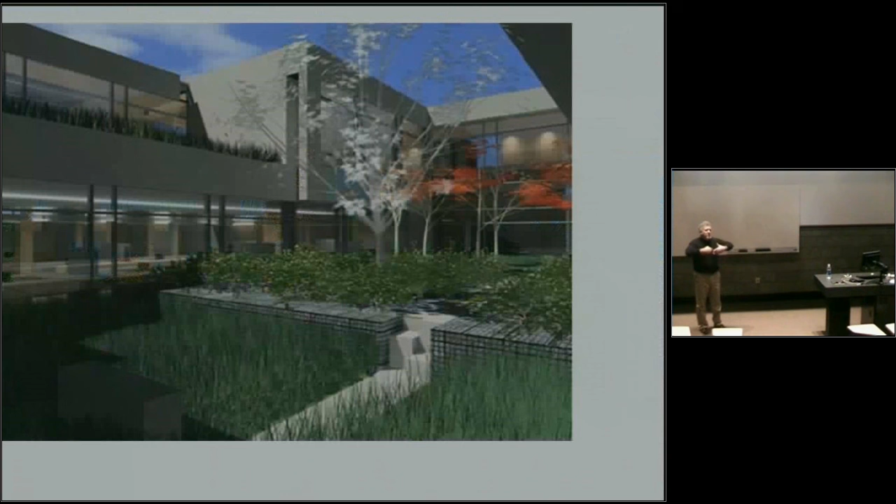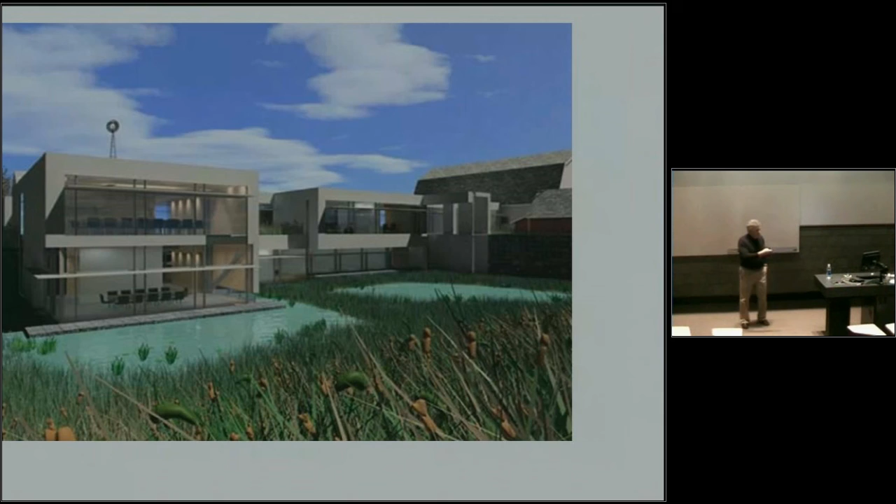Green roof elements recirculate through these water gardens. The water gardens are built right up to the edge of the building. It's all driven from collected rainwater. We have a cistern, you can see here the cistern is in the back. Then we recirculate the water from the cisterns.

Here's an indoor concept during the design phase, and this is what it looked like in reality. The cistern and the parking lots are porous. The bioswales, again, it's just integration of all of these together. I think Landscape Architecture Magazine is going to have a story on that in the next couple of months.

Hospitals: a new 11-story bed tower, Advocate Lutheran General in Park Ridge, Illinois. Green roof technologies up on top. Overflow goes through scuppers, which discharge into continuous rain gardens. Rain gardens discharge into a dry well. The entrance drive is porous pavement. The entire system is all integrated piece by piece together.

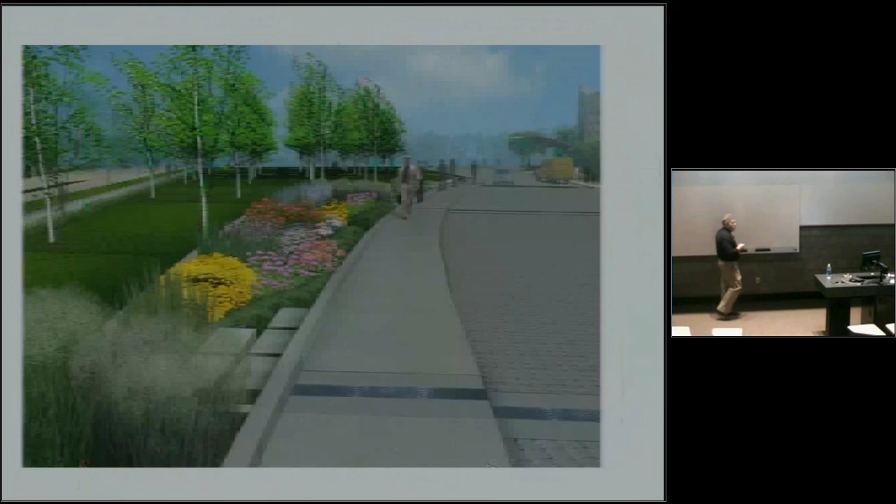Under construction right now. And then finally, urban environments. The ability to incorporate this kind of urban retrofit is a real opportunity for us as design professionals, because there's more retrofit work in most cases than there is new work.

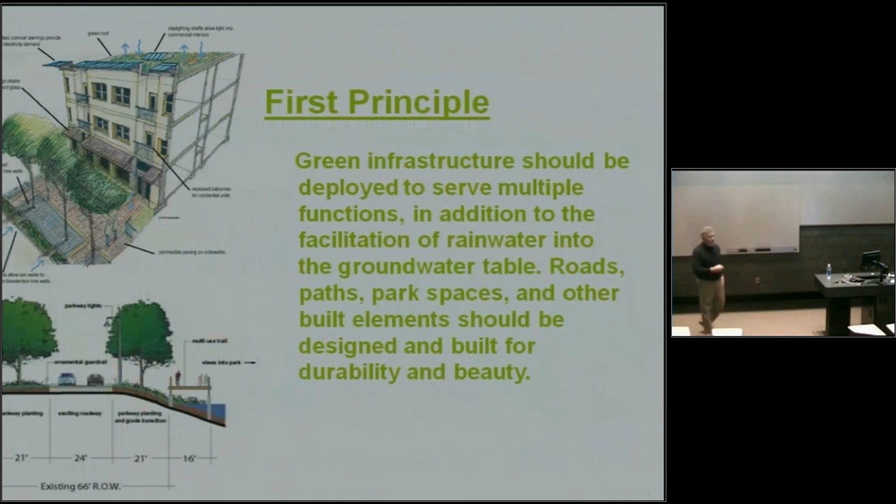One of my favorites that's going on right now—if you've seen some of the work out in Portland, this is a colleague, Tom Liptan, and his staff who designed the Green Streets Initiative in Portland, where they've taken parking lot or drive runoff and sent it through a series of little cleansing biotopes, making it a functional art element. That's one of the things Herbert Dreiseitl's work is so good at—obviously, Herbert didn't design that one.

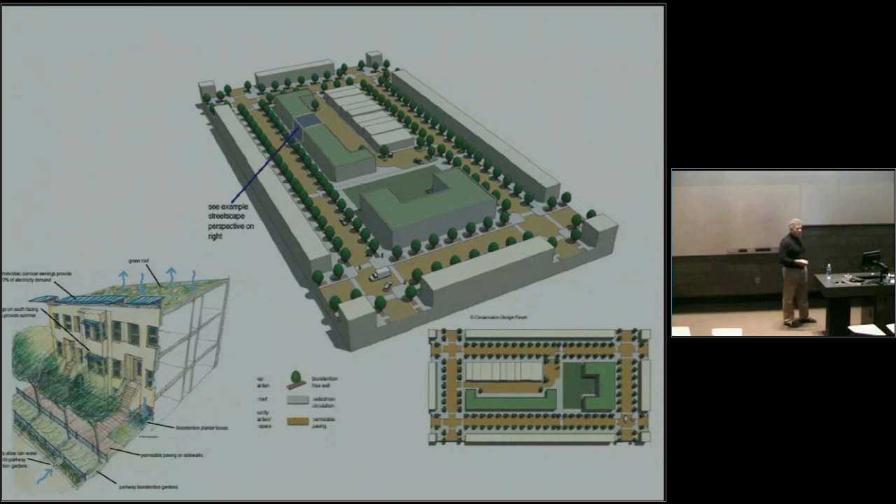We developed the green retrofit guidelines for the East River District in Detroit—the ability to take the embedded energy in those buildings and retrofit them holistically, so the buildings are healthy, and the site too. This was driven by water quality and water quantity management, so we were able to design all of this integrated green infrastructure right into the design guidelines.

Finally, some other projects we're doing—this is the Racine Historic District, and we're looking at some fun stuff here, like harvesting water using cisterns that were in place for the actual fire department back in the 1800s. They still have all of these vaults built right into their street infrastructure.

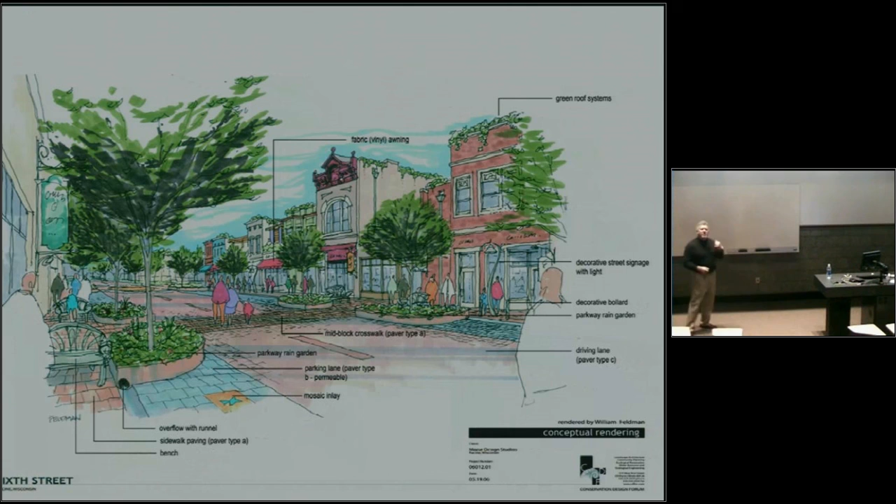We can take our water, put it down in there to get it to groundwater temperature, boost it up a bit warmer using some combination of geothermal and solar energy systems, and then recirculate it. Our goal would be to recirculate that under the streets, sidewalks, and parking lots, so they never have to use any kind of snow removal or salts—all from reclaimed rainwater—plus full-blown green roof and garden roof systems.

This is an arts and entertainment district. They can grow food up there for the restaurants or for the patrons who will live in there. So it really becomes a green urban retrofit.

A few predictions as I wrap up here: the United Nations believes, and I do too, that by 2025, two out of every three people in the world are going to be suffering water shortages. And by the end of the 21st century—I believe it's going to happen well before that—water is the new oil.

I'll close with this: 3% of the water on the world is fresh water. Of that, only 1% is actually available for human consumption. As I mentioned earlier, a quarter of it exists within the Great Lakes—that's actually 95% of the United States' fresh drinking water, which is, by the way, disappearing along with the rest of it. Yet, depending on where you live in the United States today—since the East Coast gets more rainfall than the West and the arid Southwest—30 to more than 60% of potable fresh drinking water used annually goes to lawn watering. Frightening. Totally unsustainable, that's for sure.